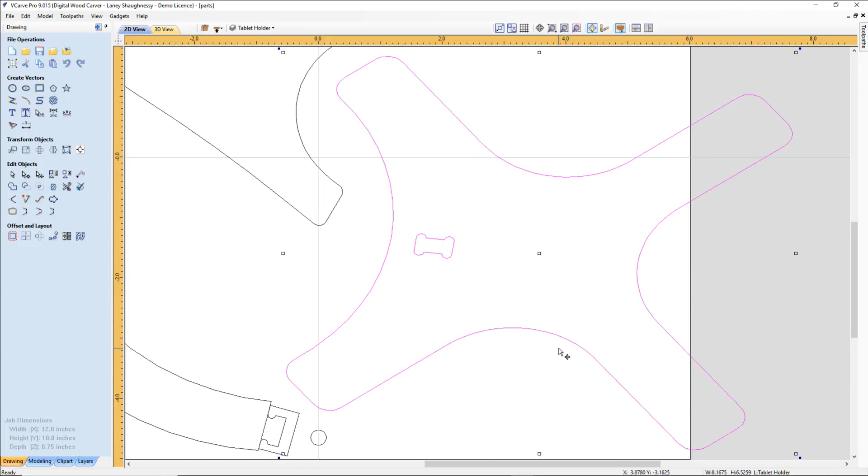From my measurement, let me remeasure that real quick. We're looking at about... all together, however I divide it up, basically with the base and the legs, it basically needs to be extended out another 1.5 inches. Whether I decide to stretch it that 1.5 inches, or change the body style and extend the legs.

I don't want to provide the files to the group yet until I'm 100% satisfied.

Luckily the screen on my tablet, for the second time now, has shattered from dropping it. I got a little clumsy with my tablet, and it's an expensive lesson to learn when you drop your tablet. It's like $100 and something a pop for new screens. I put the tablet on after I brought the piece in, and the first thing it did was just tip over. So I don't want to go too much on it.

Now, one of the things I did do is the design originally called for, I think I said something about making this out of like 3/8 inch material, 1/2 inch material. I did change it to a 3/4 inch piece of material. Like I said, I had to change my board size and move the parts around to cut out of the board.

All in all, it came out fine. I like the way it looked. It's a pretty cool looking piece, but it's not functional. The aesthetics could be the Mona Lisa as far as woodworking projects go, and if it's not functional, what good is it?

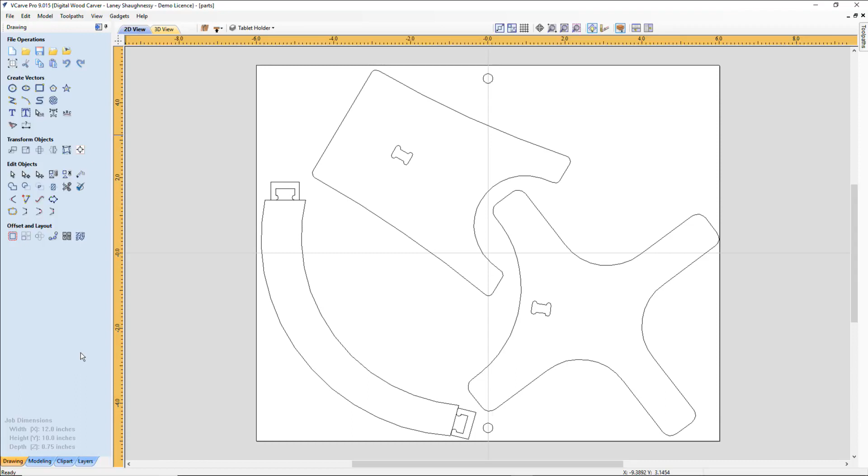All right, all that. Did I make any changes? No, I didn't make any changes. No, okay.

While we're in here, let's go ahead and open up a blank file. I'm just going to go with a 12 by 12 for some of these questions and demonstrations. Some of them don't even relate to the Vectric software - some have to do with the CNC USB controller software or the TNG.

In the past, when I've answered questions or tried to open up the CNC USB controller, it had locked up and gave me a black screen, causing a lot of buffering. So I didn't experience that this time. I don't believe I experienced it relative to this - it is the same steps in the CNC USB controller software.

Let's see if I can open the TNG software without causing a black screen. You are going to see a black screen for just a moment while it asks me if the program can make changes, but we'll see if we can get that open.

Alright, so you guys are already getting a lot of buffering going on. Okay, well, we are in a severe downpour right now, and I do not know - because I'm wired in, not wireless - if that has anything to do with the buffering. Hopefully not.

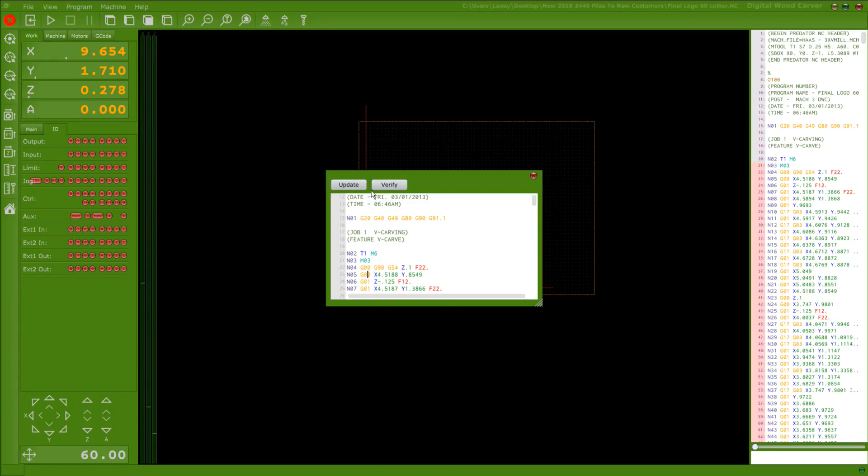It's killing me, really, because I'm stuttering on my words going, where the hell did it go? But we have the ability to come in and change things within a job. How do we bookmark in simulation mode, though? That's my question to the world. Ask Laney, how do we bookmark in simulation mode?

So bear with me a second. Here's my options. Start from select line, that's what I usually see when I right click. Start from selected line, start from a particular end and all. I'm not seeing it in simulation mode, so I'll jump over to the advanced options: start from bookmark to bookmark, from beginning to bookmark, from bookmark to end.

In order to do that, let's clear everything and start over fresh, and let me grab a line. I wish I was connected to a machine, because without that pause mode, my pause is inactive, so it's not letting me work. But one alternative: the line you pause on, write down the line number. When you load your program again to continue, locate that line number, right click, and start from that selected line. That's alternative number 2, without physically setting a bookmark. You just start from the line you previously stopped at, and make record of that line.

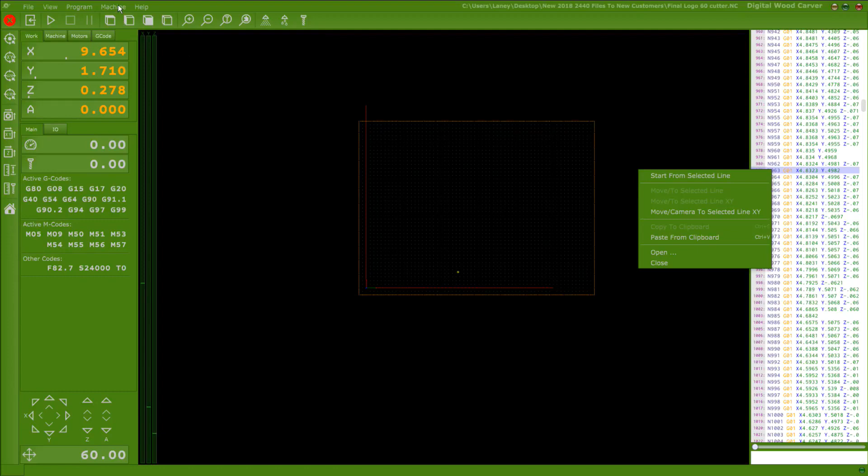Same process applies for TNG. However, I'm not connected to a machine, so it's not showing me the option to bookmark, but we would pause, then bookmark the line, and then we have the option to start from that selected line by right clicking on it. But within the machine menu, under the advanced option, we have some other options for us.

So we can run from bookmark to bookmark. We can run from the beginning of the file to a bookmark - that'd be like the stopping point. We can run from a bookmark to the end of the project. We can create a loop that just continuously runs.

If you're into kind of coding your own thing, those are the options, and they're found under the machine tab. That is the long and short of it. I apologize that I'm not getting the full menu here while I'm in simulation mode in the TNG, and I did not previously check this out to make sure everything would go through. So that's what you get with live events.

Now, on the TNG, how do you get your project centered on the screen?

Okay, that is one of the biggest misconceptions out there, and I think Dennis started it all when he wanted his board set up differently with offsets and things like that. So a lot of people think that this red box here on the screen is their table. That is not the fact, that is not the case. Now, you can set it up to simulate your table, such as Dennis did.

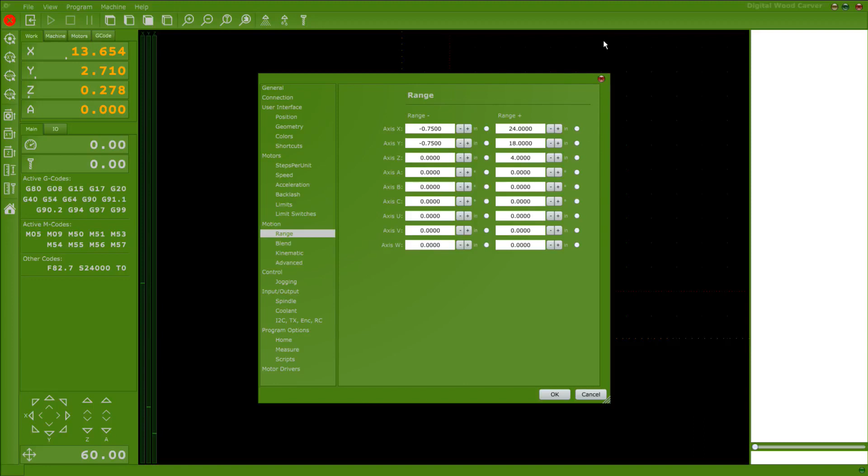I'm watching to make sure my screen doesn't go black. All right, in the settings, under your areas of limits of the range of movement, your range and stuff, you can make adjustments as needed to put the points in that position where you want it on that orange grid. But I don't want to convolute this, because that grid is not a representation of your table.

What's important is this start point. I don't want everybody going, why is my sign way off of the orange grid? Why is it over here? Why is it over there? I dealt with that back with the CNC USB controller. You need to focus on this starting point.

If your project is starting in the center for your XY datum position, your project will fall around this, and this will be the center point. If your project is in the bottom left corner, then your project's going to fall into here, and this red line is going to be on the left corner with this start point at the bottom left corner. If it's at the top right corner, then your design is going to be down here in this corner.

If you want it to be on the grid, you'll have to go into your settings, your range and limit settings, as well as the user interface, to get everything moved over. I'll do a video on that, but I don't want to confuse the issue, because then the phone's going to start ringing with, why is my design to the left, to the right, to this, that?

You need to focus on this. Also, I do not want you, because if you move this over to the middle of your table but clamp your board over here to the left, that gets into programming offsets and things like that, and it's going to become so confusing for you.

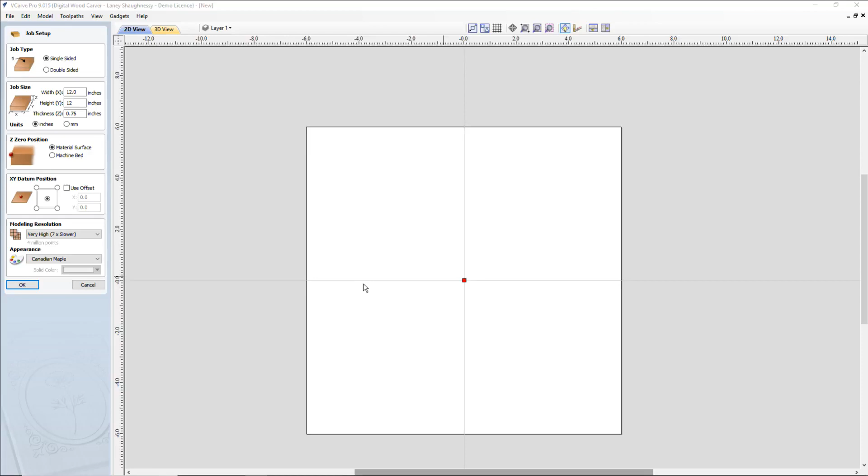Moving on from the bookmarks, in the Vectric software, how do you drop in pictures already saved in another existing project and made into a vector? Well, that's basically when you have a picture that you have traced in, that would fall under my pictures, camera roll, DXF files.

Foot shape. Let me see, I don't even know what this foot is, so let's see what this foot shape is. That's not a good picture. Let me trace a picture because I don't have any pictures right now on this computer.

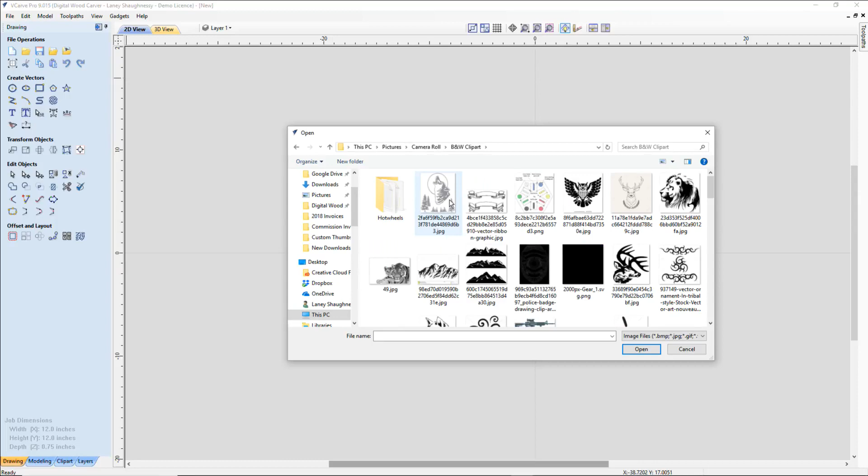Best way to do this is to import from downloads, import a bitmap for tracing. So we're going to start the whole thing from importing a bitmap for tracing. I'm going to go into my pictures, camera roll, black and white, clip art. Let's grab this lion head here. I'm going to open up the trace bitmap tool, turn the fading off on the bitmap image. I'm going to slide it through and preview that, apply it, and close that tool. Then I'm going to get rid of the picture by turning off the bitmap layer.

Now this is a design that's already been traced. I can take this design that's already been traced and export it, file, export, as a multitude of files, but I recommend a DXF file. I can export it as a DXF, and now that DXF file I can bring in.

I can come in and let's go ahead and delete this one. In another new project, I can come in and import a DXF, and now that project is imported in. It's already been traced, and I can work with it.

So long story short is, once you trace an image, why go through the process of tracing it over and over again every time you want to use that same image or graphic in another project? Once you have it traced, I don't care if it's not an image, even if it's just some text or a logo, whatever it is, export it out of the Vectric software. File, export it as a DXF, and save that file to wherever you want. Create a folder and start creating a bunch of DXF files for importing into other projects. Once you save it, you have it. Now you never have to trace that image again.

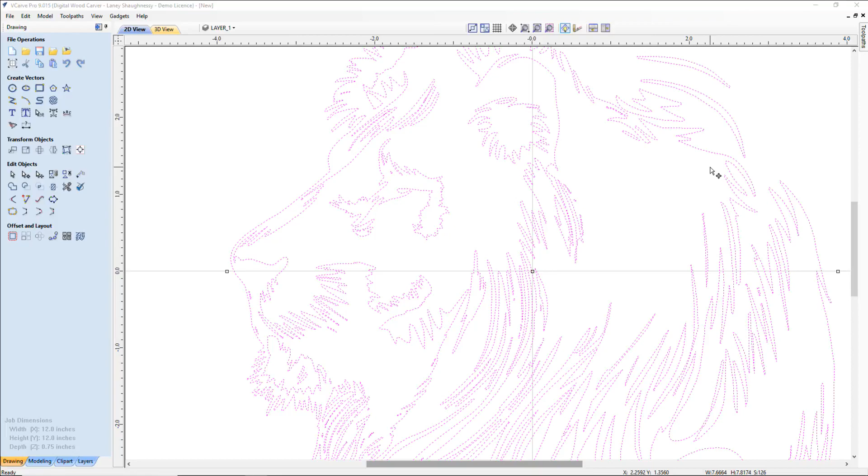Alright, now I don't have a black screen, but someone's beeping at me, so let me see what that is and see if it has to do with the class.

I'm answering a question for a customer, teaching a live class.

Alright, so export it out. Now let's stop here for a second because...

Be sure to check out the chat. A few people are sharing some information, which is good information. Very good.

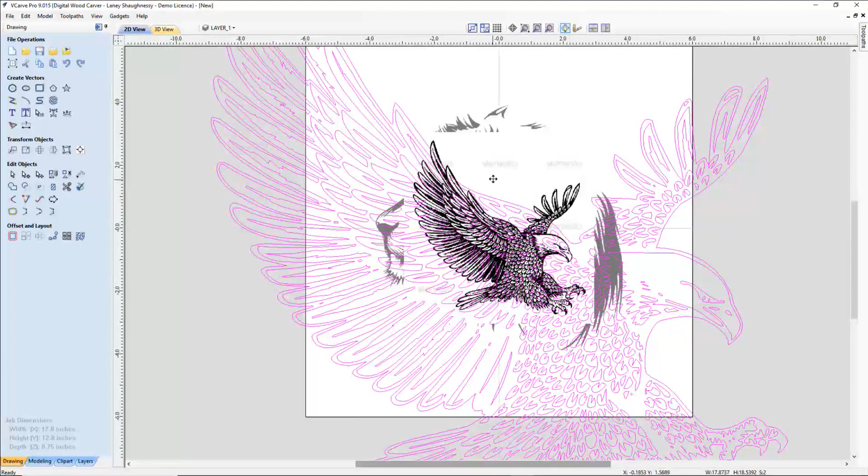But anyway, long story short, that's how you export a picture out to be able to bring that file into a future project. An example is I have this eagle here, and with the image traced and turned into a vector, why not export that out and save that DXF file so you can import it into a future project. And that's what you would do. You would export it out, and you have a choice: DXF, EPS, AI, SVG, PDF. I personally, when it has to do with something I'm bringing right back into Vectric, I save it as a DXF file. But there's all different types of file formats.

All right, so let's get back into that. Let's close this. That was a good question: how do you bring images in from another file, from another project?

All right, on the 2440 with the 2.5-inch dust hood, is there a dust shoe for the machine so I don't have to use the clear skirt, Velcro skirt, clear plastic Velcro skirt?

Currently, right now, we only have the Velcro skirt, but here in a couple of weeks we will be launching this brush. Evidently brushes have been something you guys have been exploring in the Facebook group. We visited brushes a while back ago, and this is similar to the style that we made many years ago when Digital Woodcarver started. We revamped it so it snaps into our existing magnets, our existing bolts, and all the magnets and stuff. So in the next couple of weeks, with 2 different brushes, there's going to be a brush coming to me this week from Burl and the guys, and I'm going to be testing.

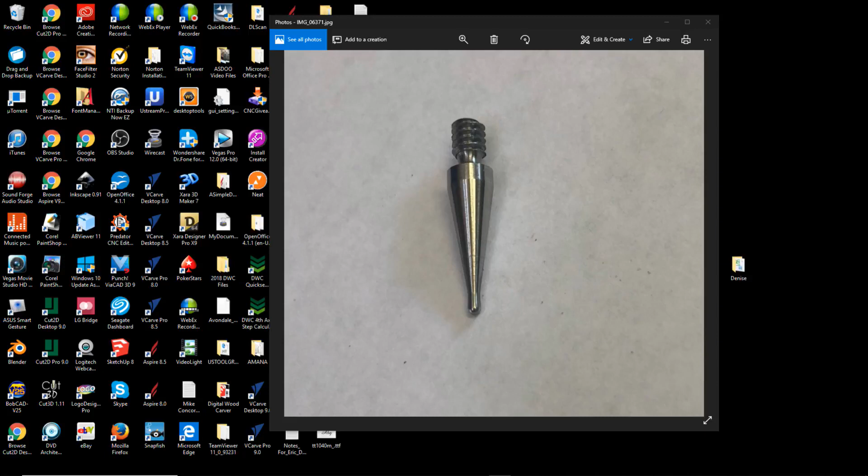But also in line for the owners of our digital probe, we now have a new probe tip. It is available on the website under the Digital Woodcarver accessories, and it has a point, a little over 1/16 of an inch, 0.067 tip radius, to provide higher resolution in those probed projects. All right.

Let's see if we can get through this without buffering. Like a champ, look at that. It's coming. Ah, Lord have mercy.

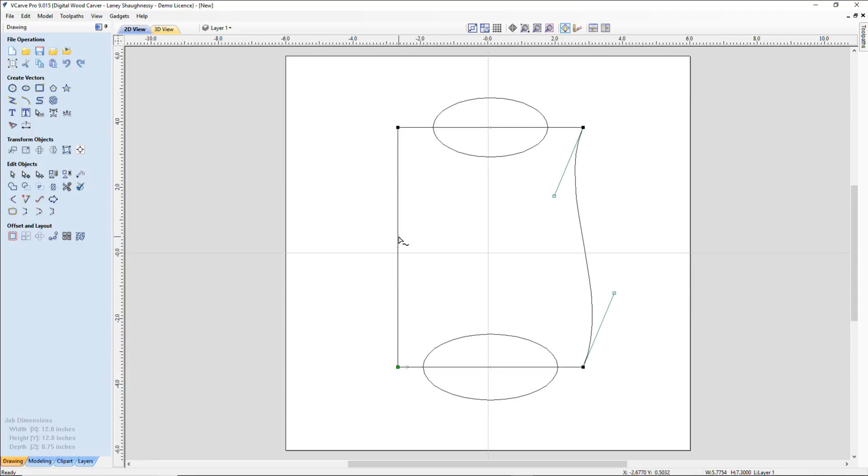And we can ultimately take all of these parts and weld them together after we select them, to create visually stunning borders. We can use our interactive trim tool so that we can trim away unwanted lines and intersections to create borders, depending on what the blend mode is and what it is you're trying to achieve.

Now this is a vector border, okay? Whether you offset that border to create that double line for V carving, or the single line for profile cutting, this is a vector border.

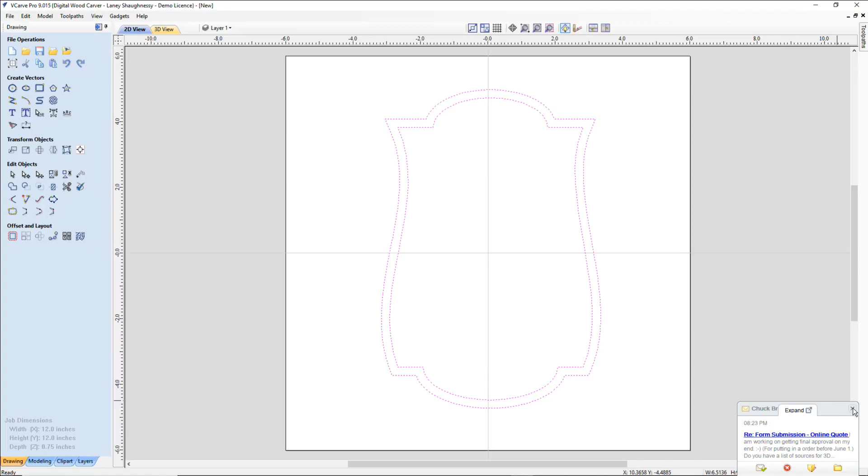If you're looking at creating a border that is like a profile, like a piece of molding, that is a completely different thing. That's not a vector border like you see here. We have to do one of two things when we create that molding. This particular design here is a vector border, just drawing multiple shapes, sizing those, doing some node editing for curves, whatever the case may be, and then blending those shapes together.

There is a wonderful video class on the digitalwoodcarver.com training site. It's the very first video at the very bottom: how to combine vectors to create borders. You can definitely revisit that and take a look at it.

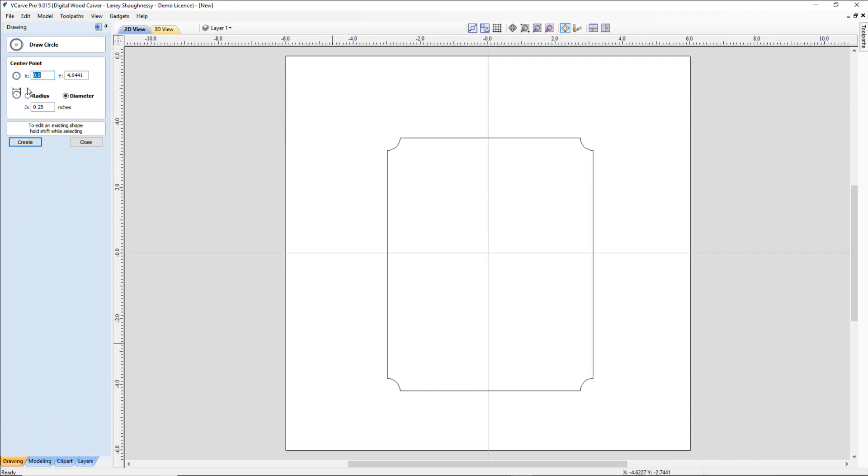You'll see those. Creating borders and all, it's basically just your imagination. Now, that's a vector border—blending, shaping, whether you draw a rectangle and you want that rectangle to have corners, or radius corners, or whether you want to add some style to it.

All you're doing is coming in here, and let's go ahead and mirror that one. Let's make sure my rectangle is centered first. And then let's take this guy and snap him back to the center there. And now let's mirror him properly, creating a mirror copy, flipping vertical.

We can select all of these and weld them together to get that kind of cafe menu style border and sign. You can create your offset, whatever it may be—let's say a half inch, whatever look you're going for, to create those style borders. You can just use a single line if you're going to do a profile cut. So making borders is very simple, it's just a matter of combining shapes and things.

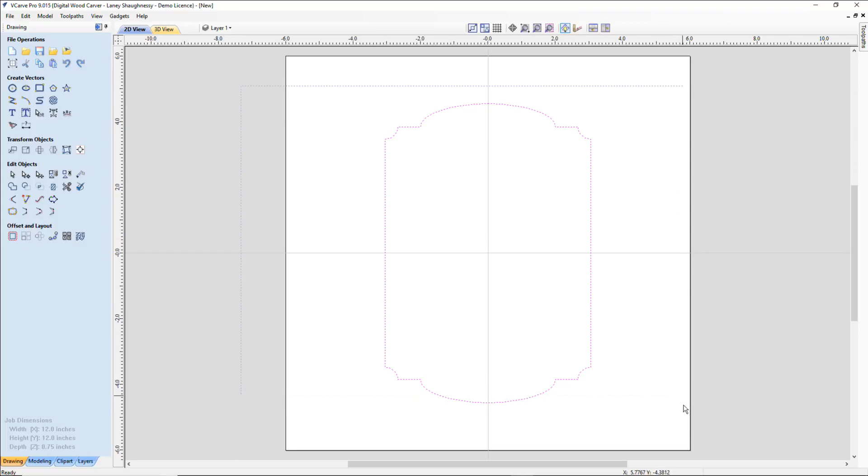But now let's talk about the actual molding type borders. Let's imagine I have a rectangle the size of my board, and I offset that rectangle inward a distance of 1.5 inches, then delete the original rectangle, just creating this inner rectangle. From this inner rectangle to the outside of my profile, that distance is 1.5 inches. Therefore my profile border has to be that wide, at least 1.5 inches.

How do we obtain that profile border? How do we get that shape? Well, the best and easiest way is to start off with a rectangle. For me, that rectangle is going to be 1.5 inches, that same offset distance, by however tall I want the border to be. Now if I was carving 1.5 inch material, I might want a thick border, so I'd probably go an inch, 1.25 inches.

If I'm carving 3/4 inch material, I'm probably going to go about 1/2 to 5/8, whatever it may be, but I wouldn't go the full 3/4—I'd leave a little bit of meat at the bottom. So in this case we're going to go 0.625 inches tall, let me get that decimal point in there. And now that's going to create this shape.

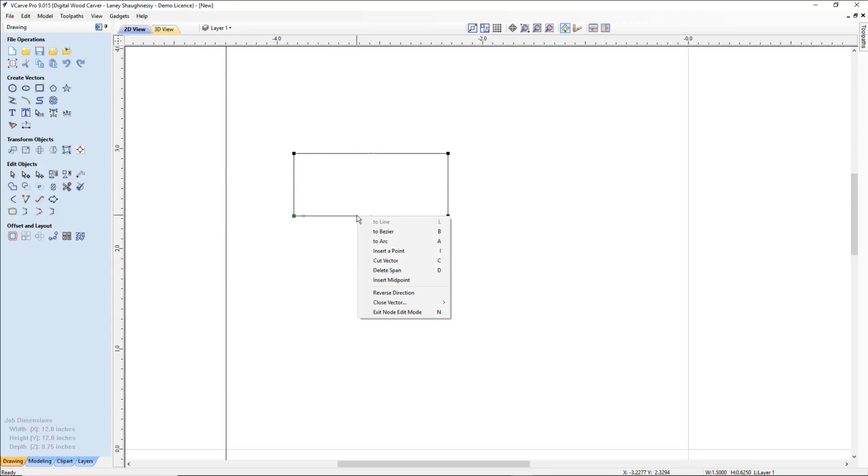Now from here I can create whatever I want the profile to look like. When you're creating a profile for a molding toolpath, you do not use the bottom span. A span is the vector between two points, any two nodes—the line, curve, or arc between two nodes is a span. So we're going to right click on this line, right on it, right click, and delete that span.

You're only working with 3 of the lines, the top 3 lines. Now from here you can start to shape your profile any way you feel. Keep in mind, whichever way you have this shaping, it's going from left to right, so it will carve from left to right. You do have the option to reverse the toolpath in the molding toolpath, making it carve right to left. But if it's something you'll use in the future with a certain style, draw it the way you want it to carve.

In my case, I'll go into node editing here, pull this down about halfway, snap to that halfway point, then come down—there's another halfway mark here—and snap to that. Okay, that's going to give me this angle.

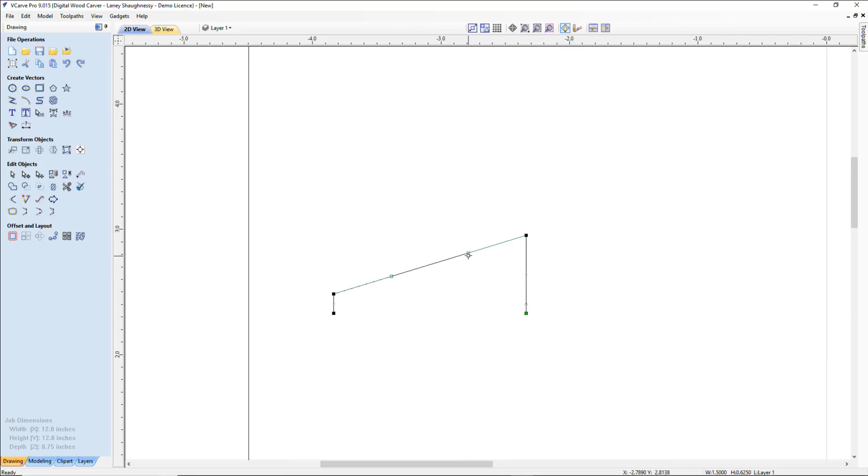Now at that point I'm going to right click on this line and turn it into a Bezier curve. I like moldings with curves, so I want that nice curve coming in, but a nice gradual slope coming down.

I'm going to grab a circle, throw it here, and then grab my line tool. When this cove comes in, this bead comes in, I'm going to have it come down a small amount—take a line and draw it straight down, straight over. This line can be whatever shape you want it to be. Oops, I didn't want that, so undo—I want it nice and straight coming across. I can even have it step down another distance if I want, or maybe even at an angle.

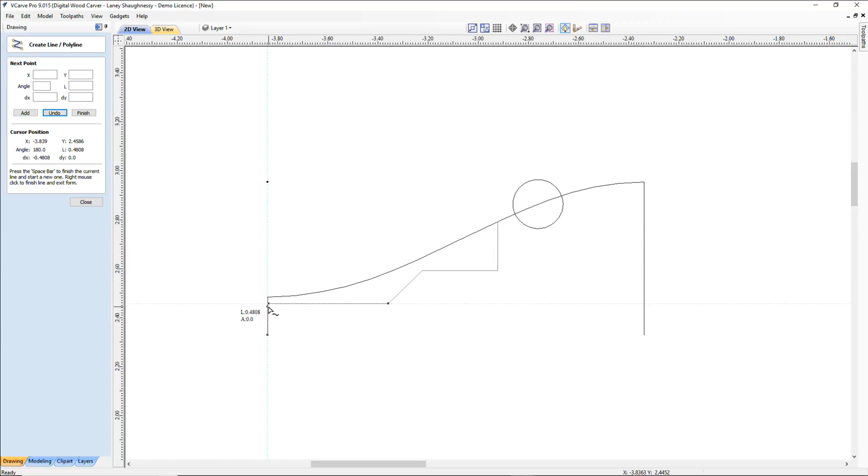Let's go with 45 degrees. See if we can maintain that 45-degree angle, and then come across straight across, let's snap to it. Spacebar to finish. Now from here I'm going to just step down straight and over, 90 degrees.

I'm going to add a fillet, a normal fillet, about an 1/8 inch radius here. I kind of like that sharp point, but I do want to gradually come in. I like that sharp point there, so I'm going to keep that.

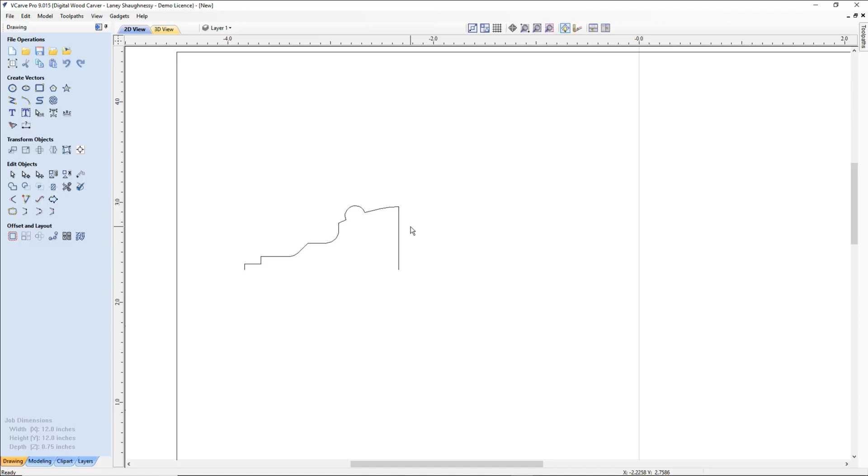Now I'm going to use my trim tool, and I'm going to remove the parts of the shape that I don't want. So therefore now I have a profile, and I can soften up edges and things.

I like this sharp point here, I'm going to keep that. I'll keep that sharp point there, but I do want it gradually radiusing in. And now I have two things: I have a profile and I have a path that profile is going to follow.

My rectangle is my path, my profile is my profile. So in the molding toolpath, that's the only two things we need. We need to select the path first, followed by the profile. And if you have your size and everything correctly, the straight lines, not the angled ones, will extend to the end of your frame.

And once, if it was overshooting it, or if it was short, that tells you you need to change the width of your profile. Now with that, I would use my 1/8 inch ball nose end mill, and I'm going to calculate that toolpath.

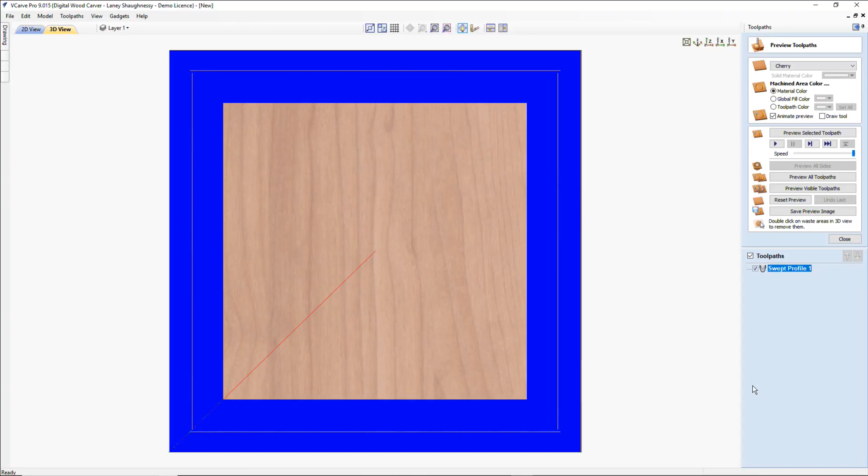Now notice it didn't create the sharp corners, so I'm going to go back in there. I like sharp corners, I want it looking like a mitered frame, so we're going to check off create sharp corners and recalculate that. Much better. And we're going to preview that selected toolpath.

All right, let's turn this to its side, and let's kind of zoom in here and turn it around. All right, so let's get rid of the center rectangle so we can have the cutout, so we can actually see that and kind of take a look.

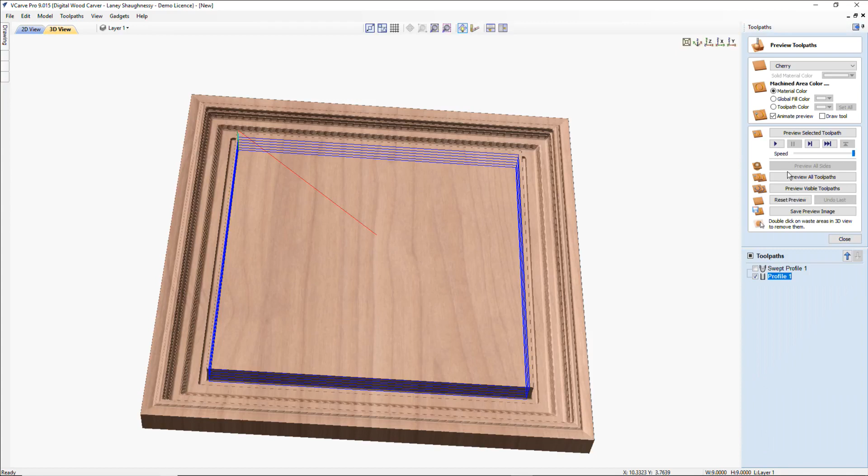We're going to do a profile cut on the inside of the line. I'm really not caring what size bit right now, because this is just for show. Calculate and preview that selected toolpath. Let's get that part cut out of there.

Okay, now with this frame, let's take it up a notch. It's all right, that's good, it's good there. Let's hold down my control key, my middle mouse button, and drag this over. Let me zoom in. Control, middle mouse, and drag it up.

Okay, so my profile is cutting in the way I've got it designed and everything. But what if I wanted it coming the other direction? What if I wanted to reverse it?

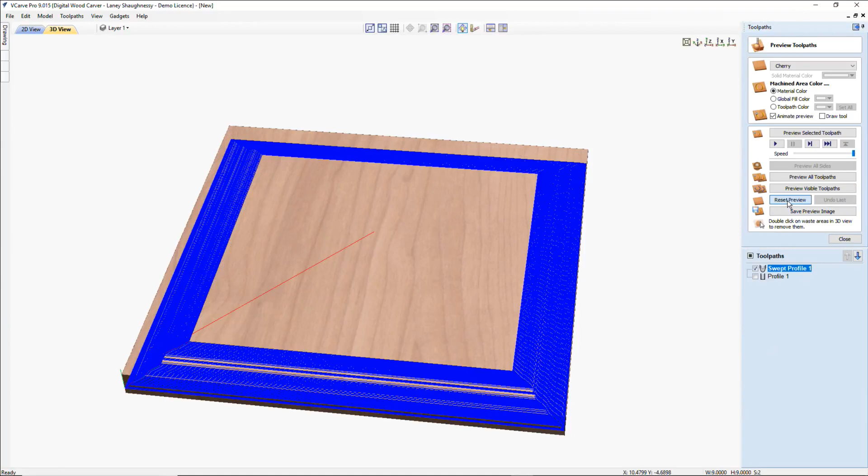Then I would simply open up that swept profile, go back to the 2D view, and on this green node, I can reverse the direction. Right click on that green node and reverse the direction. The node will switch over, and you can just simply recalculate it. You can reset that preview and preview that toolpath again.

And then let's get rid of the middle. So whichever way you want that profile cutting. Now for me, when I'm doing a picture frame of sorts, an art frame or something, I like the high coming into the low. I don't like the thickest part on the inside of the frame like this.

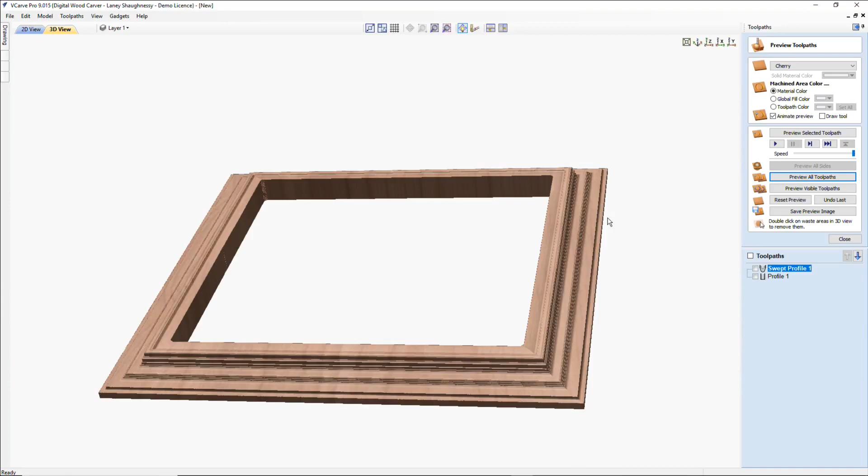If I was doing some type of cabinet face or something, then yeah, this might be acceptable. Maybe it's kind of a raised panel type effect that I'm going for, then yes, I need that thin area down here so it fits within my raised panel rails and stiles. But for me, the way that I drew it is from running left to right, and that's what I want.

And now let's change this up a little bit. Let's close this for a second, and give ourselves a little bit of a change here. Let's go into node editing on this, and let's smooth this point out and create this as a line. Delete this point, delete this point. So I have this nice little curve, just a very short slope here.

And I do want to pull this down ever so slightly. There we go. And for here, let's go ahead and turn this into an arc, and pop up a little bead there. All right, slight little change there.

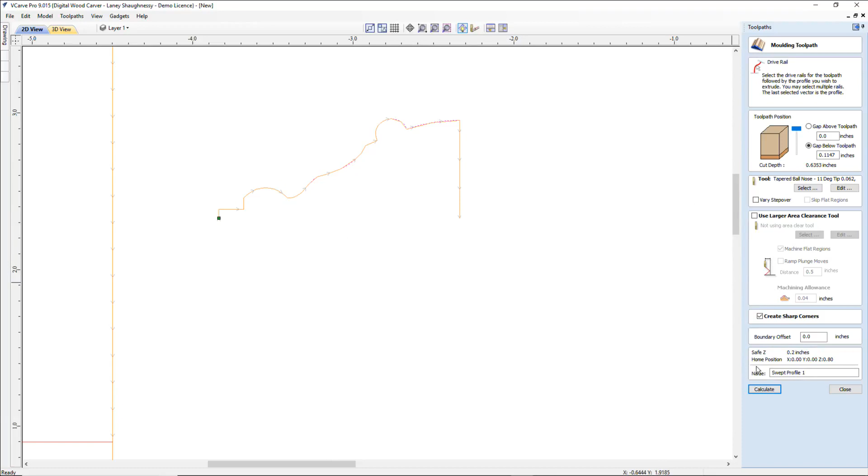Now we'll go back into that toolpath and recalculate it, reset that preview, and then preview that selected toolpath. And again, when I'm doing frames and things, I like the thinner in coming out to the thicker frame - picture frames, art frames, what have you.

And typically on the back of this, there would be a pocket where it would fit around my canvas and stuff. Let's cut out that center.

Double click on it to get rid of it, and let's pop this up into a full-on view so we can see that frame and all.

Speaking of exporting out, when you create your profiles and you find a profile you like, or as you create profiles, export them out as a DXF.

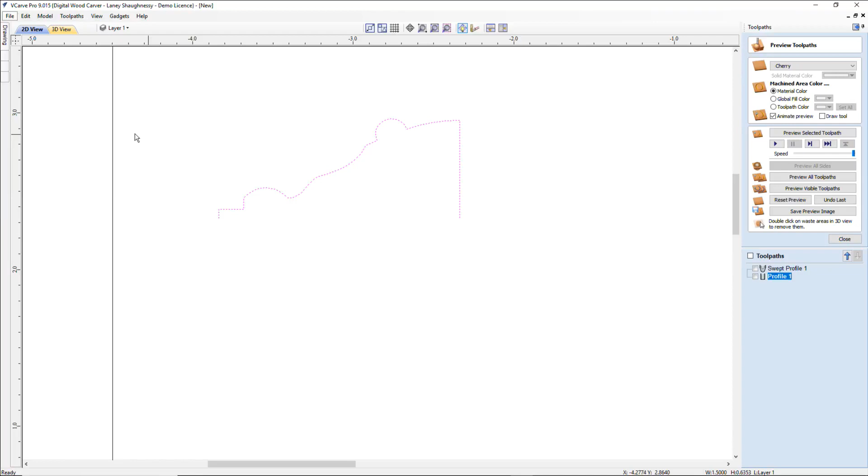So what I'm going to do is just save this as new molding 1.5, just so 1.5 inch, new 1.5, and save that.

But what that allows me to do is I can go in now and I can import those picture frame profiles, all of these. I could have done that to begin with, where I have all these profiles, these picture frame profiles. I can add this guy to the group.

Rather than just saving an individual file and then having to delete it, just add him to the group, and now I will export them, select them all, and export them out as a DXF. Now I will overwrite that picture frame profile, replacing it with a new updated one. As you create profiles, add them to it and start getting a repertoire of different profiles and things.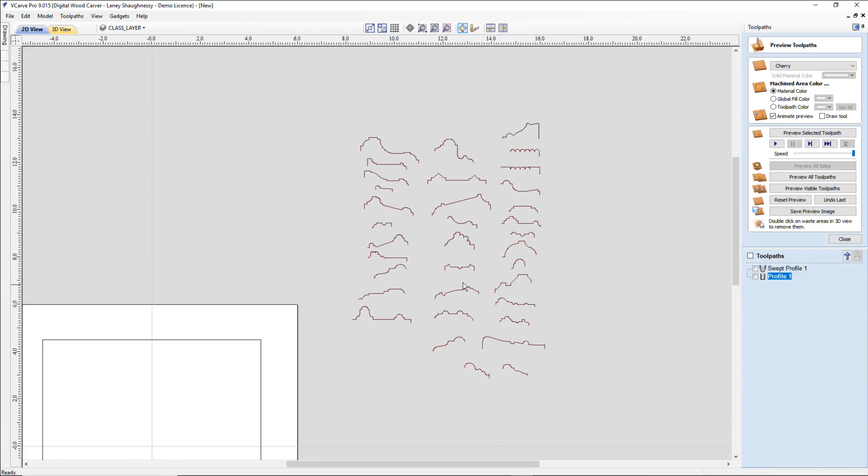So that's how the swept profile is how you create a border with a molding for your picture, your carving, whatever it is, or you're just simply creating the 2D. Now you know why I didn't type all that out in Facebook.

All right, let's go back here. You guys all still with me, or did I put you to sleep?

Can you do a molding toolpath on just 3 sides? Absolutely. You can do a molding toolpath on anything.

So let's imagine that we'll make an arch there, 3 lines, so that would be a rectangle. Go into node editing on this guy. Let's hit escape to close that tool, node editing, and delete this span.

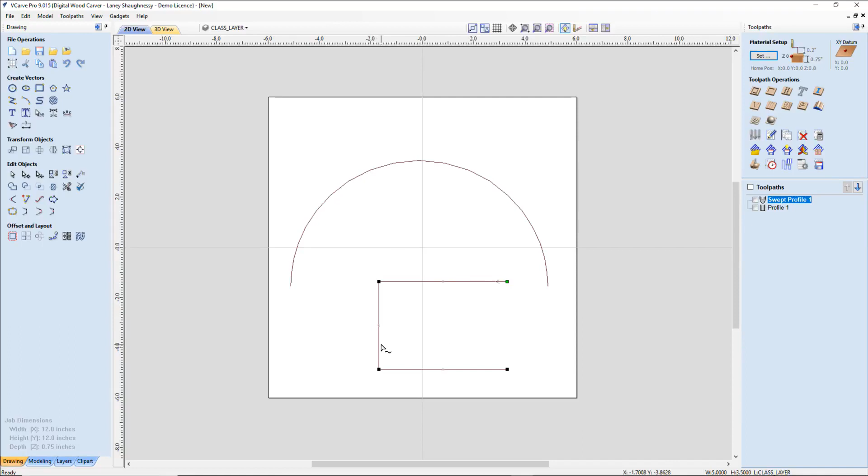Let's imagine that that's the left leaf of our table, whatever it may be. Your profile can be any shape that you want it to be. It doesn't have to be a rectangle. It doesn't have to be a square. But here's 2 options here.

Now I'm going to import my picture frame profiles here, and let me grab this guy. Get out of node editing. Let me drag him over here for a moment.

Now, depending on his length and width, it all depends on how wide I want my molding to be, how wide I want my molding to be and things.

In this case, if I look at the size of this, this has an overall length of 2 and 2 and 7/16, a little over. I would want, let's say, 1.5 inches. You know, scale that down, 1.5 inches wide, and I'll use that for both.

So in that molding toolpath, select your profile, select this. Now, you have the lines coming in or going out, depending on which way you want this molding to follow.

This green node here, you either reverse direction, it's going to carve inside this small arc or outside of this arc for that higher radius. Calculate that toolpath. Reset that preview of the selected toolpath.

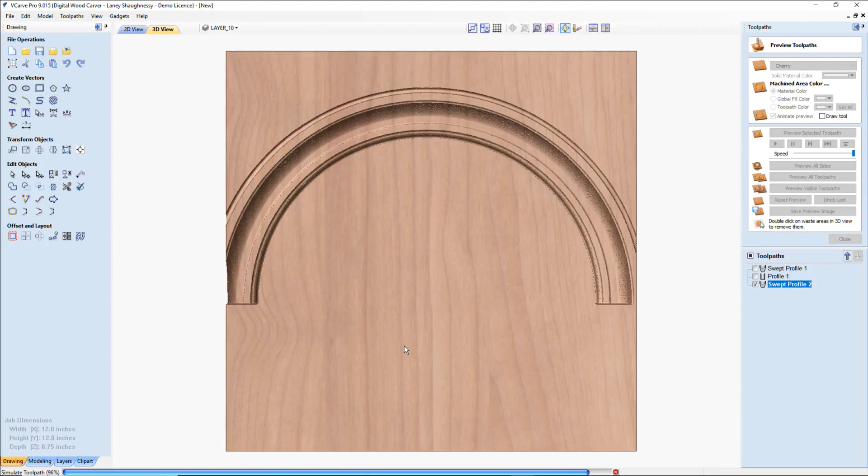If you're making the arch for the top of a window or something, and let's say you've got to make this arch in segments, that's where tiling comes in, toolpath tiling and stuff, and all. So you can create that arched molding, and then do your profile cut.

And of course, your profile cut, knowing if we come into this and we open this up, knowing that we have that 1.5 inch distance, we can offset. We can close this tool here. We can offset this outward that 1.5 inches.

And then we can take, depending on what angle we need to cut this molding at and everything to make it look good and all, we can join this. Oops.

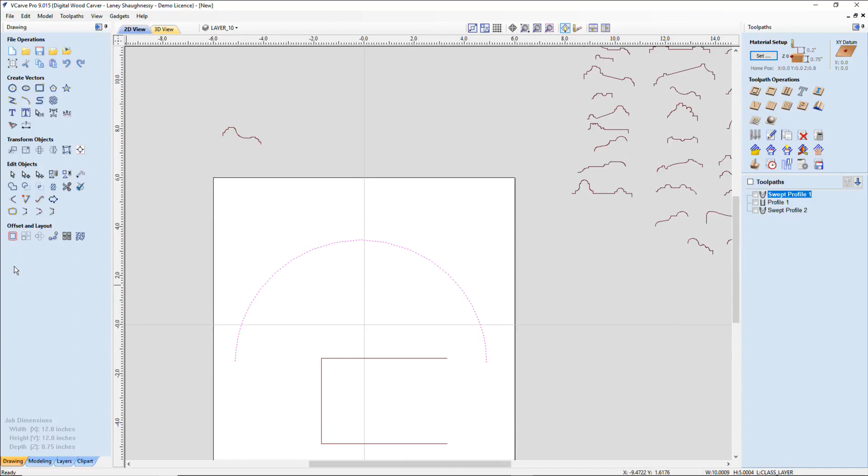I offset both, bear with me a second. Let me offset just this one. There we go, ta-da. I offset my other profile too.

We can join this with a straight line, close it off, so that way we have the profile cut to cut the part out. So if I were to create that profile cut, I think my ends are going to be a little off, but let's calculate that, and now we should be able to.

Killing me. This guy right here, profile cut. This guy, calculate them so we can cut out that molding.

You know, depending on what angle you needed the ends at, that's the important part. So yes, you can do it on an arc. And if we did the same thing here, if we select this profile and calculate that molding tool path, you know, if you're doing that leaf of that table or what have you, the answer is yes. It can be a straight line, a curved line, arc line, whatever it needs to be. You can create that molding profile. In this case, you'd most likely reverse the direction of that one because it's kind of high and heavy, so that it's coming from the outside down type of deal. Whatever it is, but yes, the answer is yes.

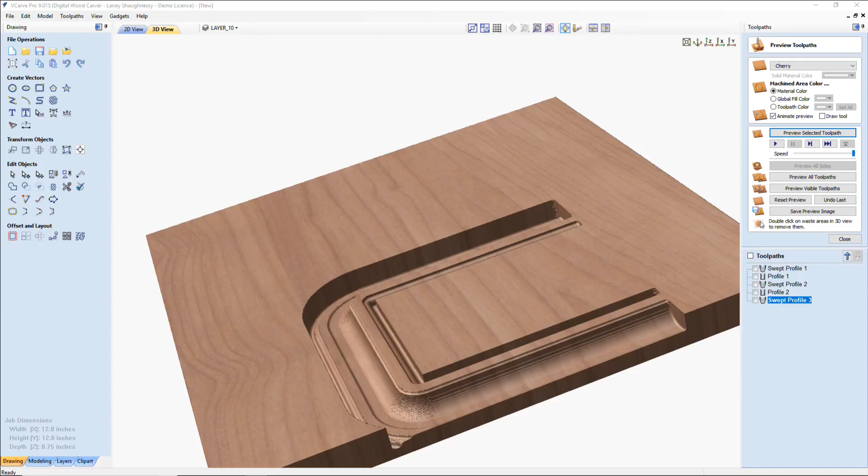All right, let's go up here. Okay, let's close this, or not close it, but let's delete all those. Okay. Bear with me as I peruse. Alright, I would like to know what I need to set up in VCarve Pro, Desktop, or Aspire in this case.

So when I check the times of the carving toolpath, it is more in line time-wise with the carving time that is stated in the CNC USB controller. So your estimated time in the Vectric software currently, right now, if you're using the 2440 CNC, your rapid rate is 150. If you're using the mini carver, it's 125. The scale factor is 1.2. So let me explain to you a little bit about what scale factor is.

So let's say I have a scale factor of 1. And my estimated time says to cut all these profiles out of my board, whatever it is, it's 3 hours and 56 minutes. And then I go into my CNC USB controller program or my TNG program, and I run that job. If that job takes me 3 hours and 56 minutes, then my scale factor of 1 is correct. If it takes me 4.5 hours, then my scale factor needs to be adjusted.

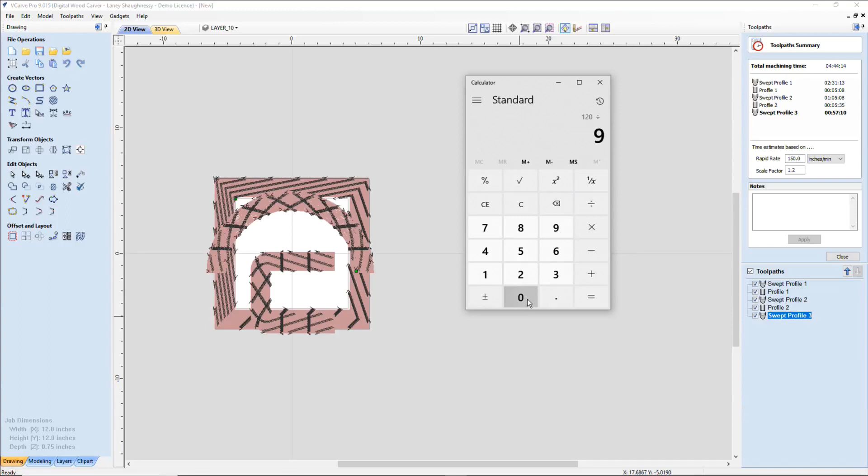So if I have an hour and a half long carving, 90 minutes, and that's what the software is telling me, and I go in and it takes me 2 hours, then that would be 120 divided by 90 equals 1.3, or 1.33 if you want to be spot on. And so that sets the scale factor, and that'll bring those two more in line.

And the deal of it is, the Vectric software doesn't know how slow the machine slows down when it's going around corners, what its acceleration rate is - all of these factors that come into machining time. All it knows is the feed rate, the plunge rate, and the rapid rate of the machine when it's not carving, moving above the board from one place to another. It only knows those three things. It doesn't know acceleration, deceleration around corners, and ups and downs. So it can't take those into effect.

That's what the scale factor is, so we adjust the scale factor accordingly. If I have a 1 hour carving in Vectric and it takes me 2 hours, then my scale factor is 2. So you just adjust your scale factor and that will bring you in line, so both your estimated time tool summary in the Vectric software and your estimated time tool summary in your TNG or CNC USB controller bring those two in line together. Good question. Alrighty.

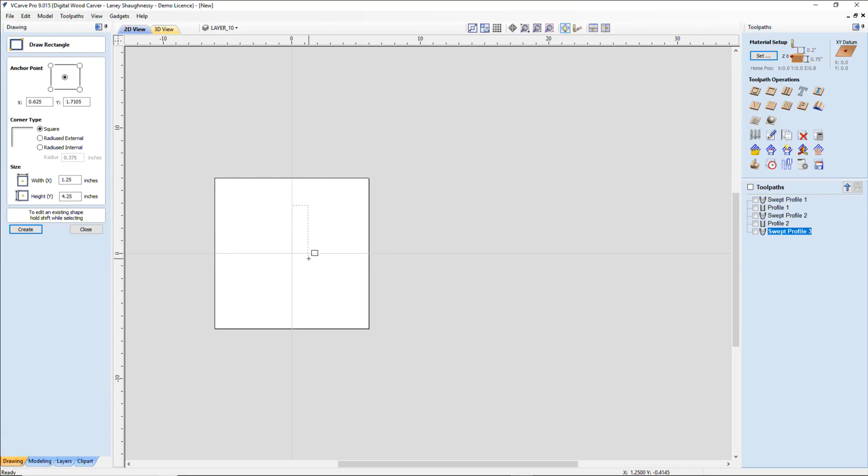Okay, let's go up here. What are the rules for zeroing out the Z-axis on the digital wood carver diamond bit? Good question, let's see here. And I'm trying to go through these - I'm not in any particular order, guys, I'm just going through - and let me see if I can draw this out.

Okay, let's make this one a little fatter. And let's get him centered up. Okay, oh, we're missing one thing. And I need a circle. Where's the circle at?

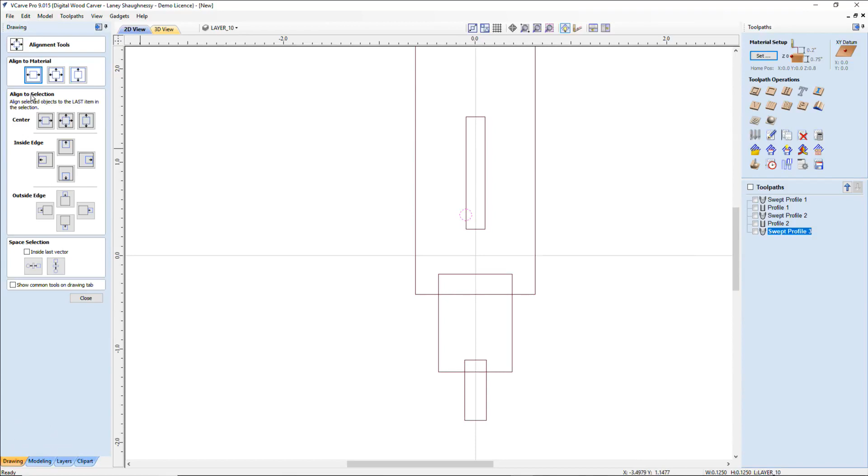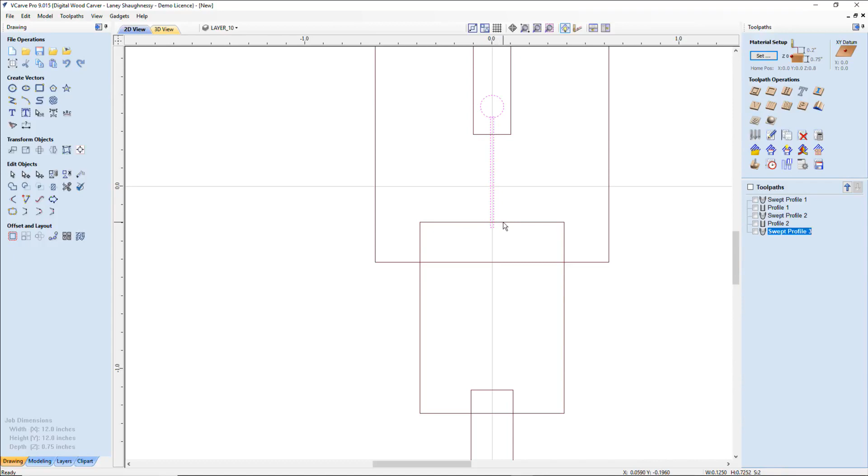All right, play along with me. Imagine that this is my diamond drag bit here. Now this diamond drag bit is tied... let's see if I can tie it together. Bear with me a moment. I want this to be as accurate a representation as possible, so let me get everything done, and let me grab this, and weld it together.

All right, might as well get this one welded to this one. Okay, now inside of the router bit holder, inside of the bit holder, we have our diamond bit, and there is a plunge mechanism. It's spring loaded. So up in here, there's a spring inside of this holder.

When you are zeroing out the diamond tip bit, typically you're either doing the quick engraving toolpath, profile, or pocket, depending on if you're doing a fill engrave or a profile following the lines. Or you can use the quick engraving, which is a combination of both. That's similar to if you were doing a laser cut, but with the diamond bit you're engraving.

And so with that diamond bit, your cut depth, whatever it may be, should be set to 0. Just like if you have the digital laser, your cut depth is 0. We don't want the router moving up and down, okay, when it's engraving.

But with that spring, what we want to see happen is when it's in its resting position, this ball here in this little window on the side of the bit, when we bring this... let me see if I can do this systematically. Let me get it touching on the bit. There we go.

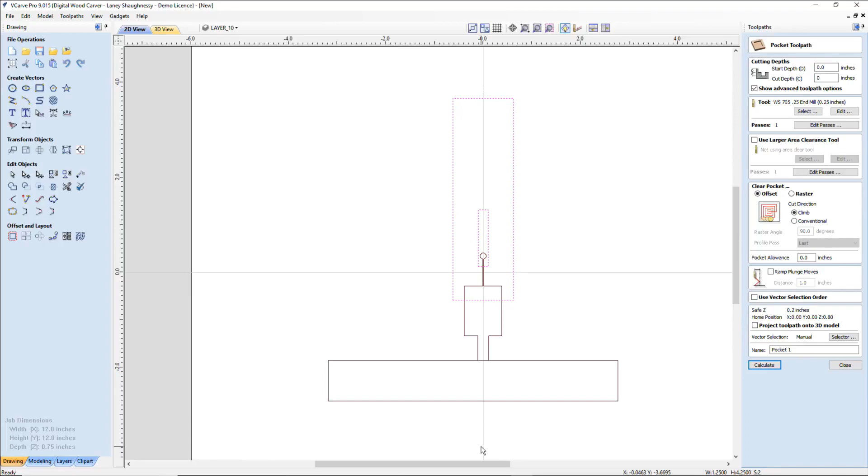And that's where you would zero out the Z in your CNC USB controller or your TNG. It will make the Z with that much pressure. That way when it's carving, it's putting pressure on that spring, and that spring is keeping the force of that bit against the material. So the goal is, on the little window on the side of the shank, the holder part, you want to see that pin retract up about a quarter of that slot, to have decent pressure against the bit, with the bit against the material. That's the key to it all. That's where you should be zeroing out your drag bit.

My pause, sorry about that quietness for a moment. Trying to read. Okay.

I know the answer. However, as a new user, most beneficial for... So when it comes to end mills, upcut or downcut bit, where's the best place to buy bits?

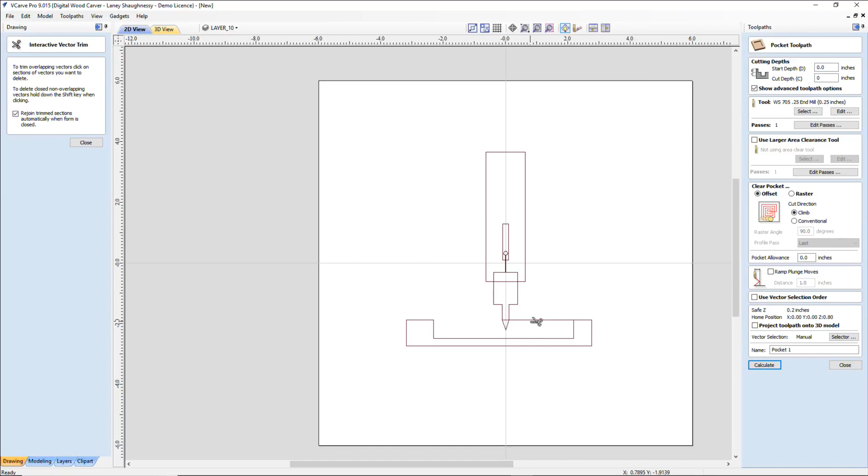Let's, since I got a router bit here, pretend for a moment that this is a V-bit. Okay, and let's pretend... all right, let me group all these guys together.

Imagine we have just done the clearing pocket path for a V-carve raised effect design, and we've got our V-bit in. When we put that bit in, we always zero out the Z on the original surface of the material, because that's where we've set it up from.

If I'm getting inconsistent cuts, maybe my touch off was a little too heavy, so my cut is coming a little deeper, leaving a groove, or maybe it's a little light, so I'm getting a little lip around the letters. What would be a way we could compensate for that?

We can actually move the bit in, and you can even use your touch plate if you want to. But let's say that this pocket cut here is a quarter of an inch deep, right? 0.25, a quarter inch, whatever — I can bring my bit down and touch off in that pocket.

Kiss right down to it, not with my control key. And in the software, the TNG software, I can come in and tell it that position — instead of zeroing it out at 0.01 or whatever, I can type in negative 0.25 in my Z box, telling the software that this point my bit is sitting at right now is negative 0.25.

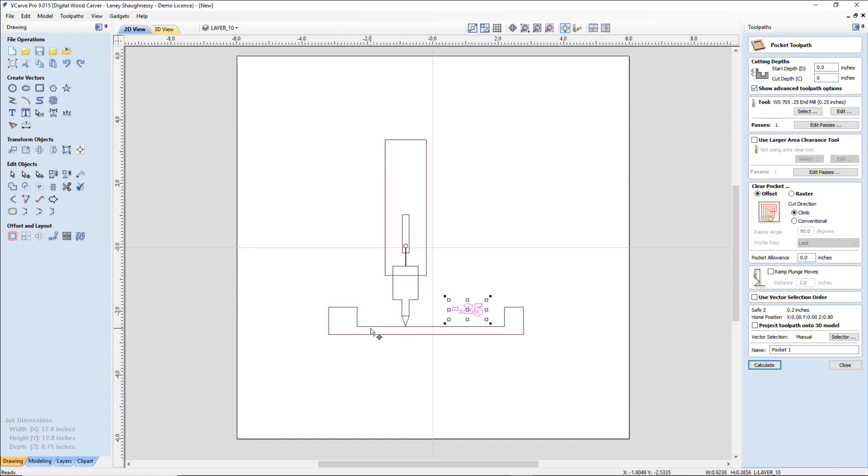Now, if you're not comfortable touching off and wondering what happens if I touch off too far or not enough, well, if at all possible, if you can throw your touch plate into somewhere in that pocket and hold it nice and flat, you can touch off.

Let's undo that. You can touch off on the top of that touch plate.

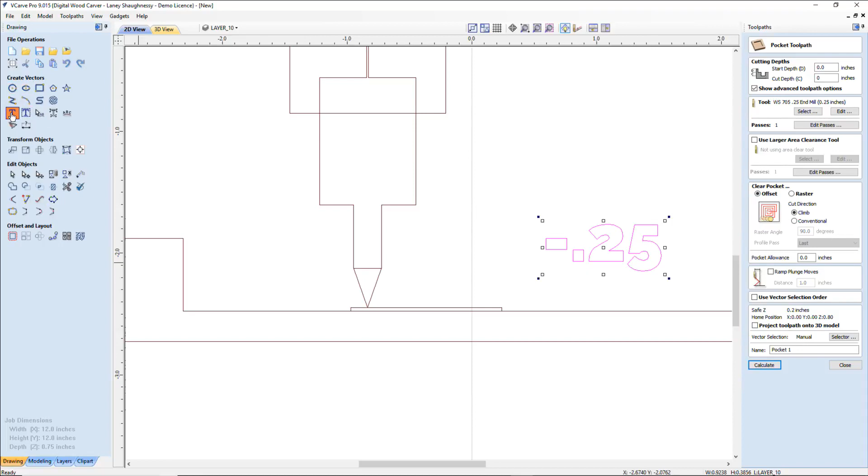And now you tell that program that you're at — any guesses? 0.24, not 0.25 — 0.24, because you're sitting 0.010 of an inch up from the bottom of that 0.25 pocket. Now you're sitting at 0.010, so subtract it from there.

And now the software knows where it's at, and that will create a consistency between the V-carve cut and the pocket cut. If you can't get a consistent touch off because your V-bit might be poking into that touch plate more so than the end mill did — since it's a wider surface area on that end mill versus that sharp point of the V-bit — and you dimple your V-bit, you're just not getting a good touch off and you're getting these witness lines, well then zero out the machine.

And when I say zero, I don't mean zero, but come over and move the machine, touch off in the bottom of the pocket or on your touch plate in the bottom of that pocket, and program your Z for that depth — tell it what it is. This is this depth, and then it will know. That's essentially the same thing as setting the Z-zero. 0.25 inches from this point up is zero. So that's another way of doing it.

Yeah, and let's see here, let's see if I can find... Howard Wayne, tell me if the Dave Garbett question is in the group or in the list that I'm reading off of in the Facebook. If it's in the group, I got to scroll up in the group. Let me know, Wayne. All right, let's see what we got here.

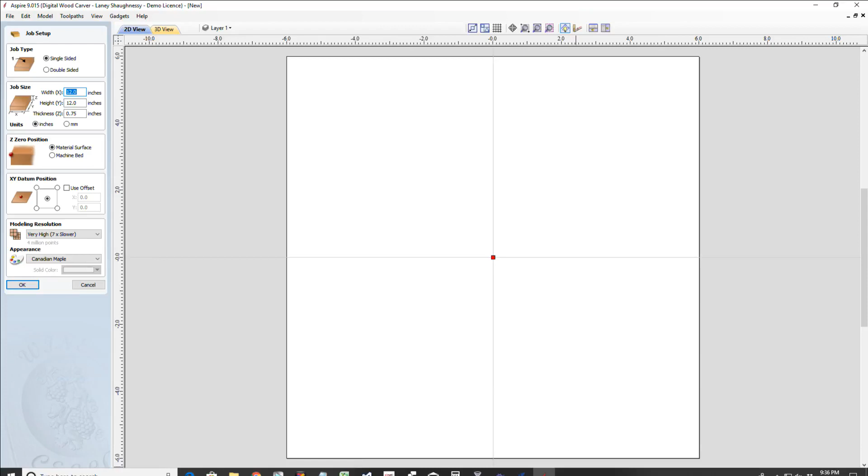All right, so the purpose of a two-rail sweep is to have a profile or a design follow a path. You have two-rail sweeps, one-rail sweeps, cylindrical sweeps and stuff. So with a two-rail sweep, you are either drawing your lines vertically, and let's draw some lines.

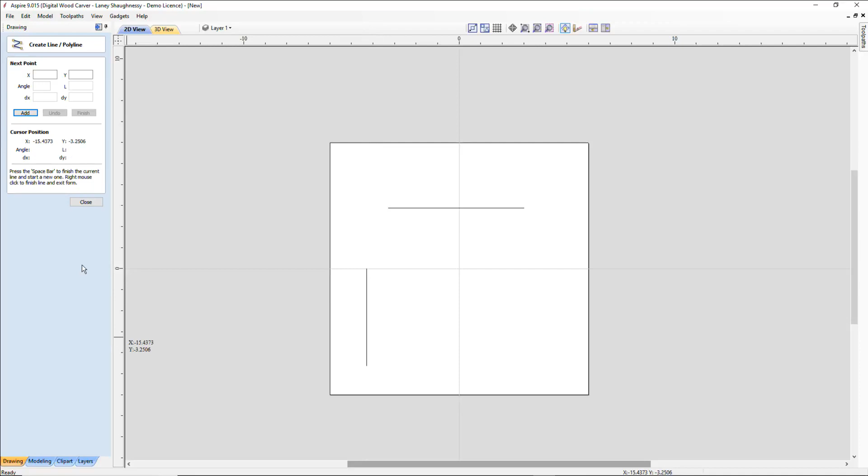Or you're drawing your lines horizontally. And of course we need two, so I'm going to hold down my control key and drag this one over, and drag this one up, holding my control key. And now...

I need a profile. So I'm going to node edit this, delete this span. Very simple profile, we're just going to turn this into a Bezier curve. Let's pull this one down and let's pull this one up.

Once I have my two-rail sweep tool, I have to first select my guidelines, and those become your drive rails. You want to make sure your rails are driving with start points in the same direction. Those arrows here need to match, or else it twists your profile.

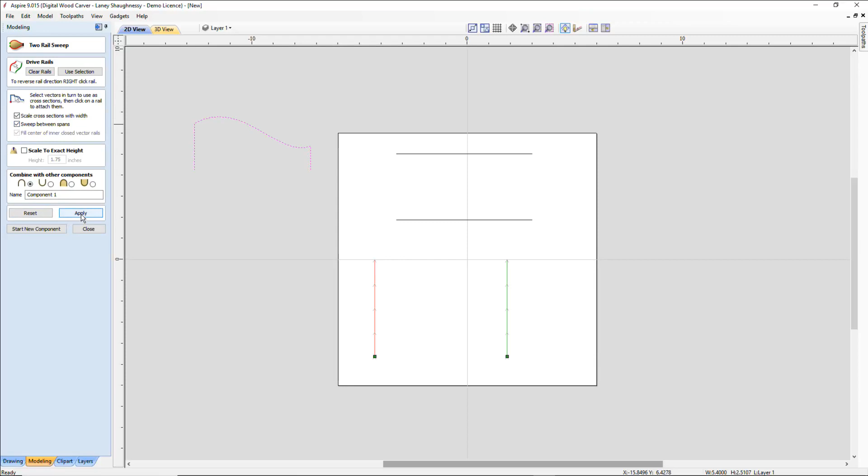Once I have that as my selection, then I select my profile and I have options. I can scale the cross section with the width, sweep between the spans, fill the center, whatever the case may be, and apply this. And that's going to ultimately create that two-rail sweep.

Same thing if I had my horizontal lines and this profile, that 3D view -- so it's just you drawing your two lines, your curve.

The two-rail sweep doesn't have to be a straight line. It can be an arc, a curve, a Bezier -- again, just like we were showing with the molding toolpath, if we were making archway molding or things like that, we can use the two-rail sweep for that as well. We're just drawing that path, those two lines, and then drawing our profile, whatever shape it may be, to sweep between those two lines.

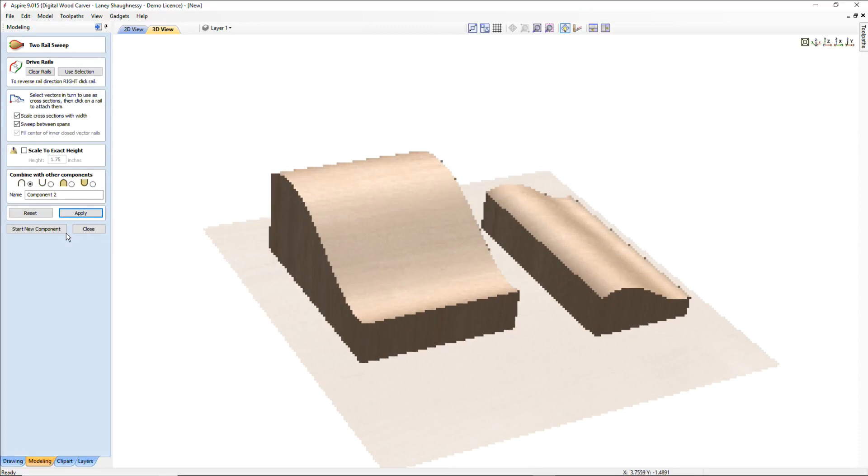So that is all there is to the two-rail sweep, and it can be even geometric shapes, guys. So let's say I have a 4-point star, not a 5-point, a 4-point. And I come in here and scale this down holding my control and shift key, and bring in a smaller version.

So now my two rails are the outside of this little bitty profile and the outside of this big profile. With my two-rail sweep tool, I've got my profiles selected, and those are my guide rails, my selection.

Now I can actually add cross sections to this. I can reverse the rail the way it's flowing, remove cross sections, which I haven't added yet, but I can make it a start point. I can swap the rail order, which basically reverses it. So there's all kinds of things I can do in here.

And I don't want to scale the cross sections here, let's see here. Let me get my mouse. Oops, let me select it. I keep right clicking, I want to left, left, left, right, left.

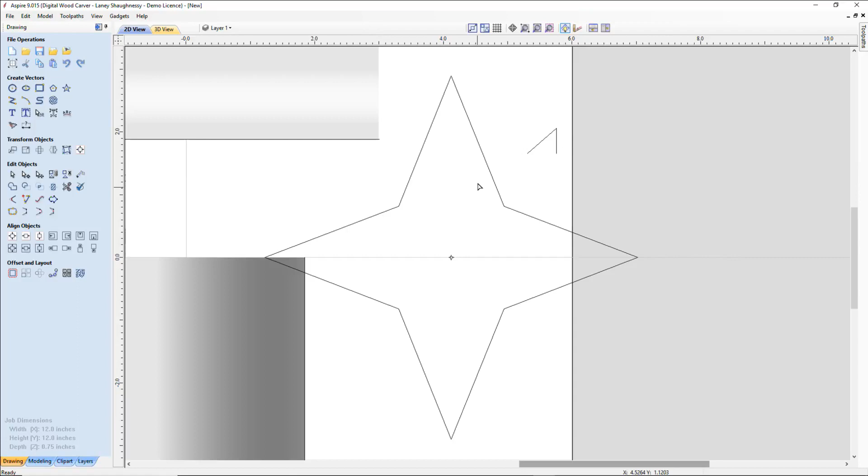All right, so now as I come into my 2-rail sweep, I select my 2 rails, my drive rails, okay, and then I select my profile.

When I click on the rail after the profile is selected, it shows where this profile is going to be swept across. If I right click, now that it's showing these profile lines, I can add to all of the rail nodes. I can add these, and I have nodes at each of these points, and that's typically what we want. We want to divide this up into segments.

This is what creates that kind of nautical star shape. So now when I apply this, the shape is getting applied to all of these segments, but also these segments. Let's look at the 3D view here.

My star is cut off on that one side. And let's not scale it. Sorry, let's apply that. Let's tone that one down a little bit. There we go. The bottom lines are a combination of 2 lines and a profile.

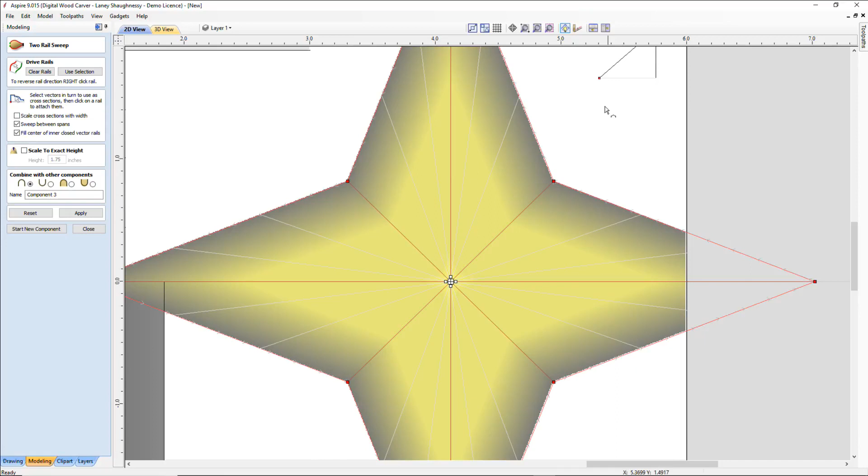Or you have 2 profiles and a profile. Basically these are my lines, this center and this outside edge. That's my 2 lines that it's following. And they don't have to be open vectors, they can be closed, like this star is a closed vector. Then draw out your profile and create it.

All right, so very good question. All right, so let's go back up to Dave. Dave had a question. Let me see if I can track her down.

Thank you for that compliment about the bits, Howard Groves. Todd. Roop.

I found this, tell me if I'm reading the right one, guys. I found this site over the weekend. It's more for scroll saw cutters, but I've used a few PDFs in Aspire, and it worked great. Wanted to share this with the group if it helps. Google Steve Good scroll saw. Yeah, Steve Good's a friend of mine. Got a lot of nice patterns.

Trying to go back, Dave, and find... Laney, if you have time, could you show how to change or switch the project 90 degrees? Was trying over the weekend, no luck.

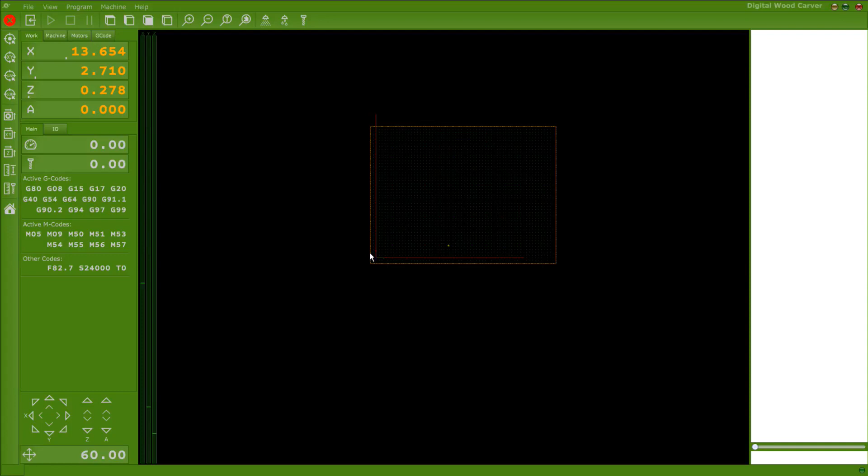In the Vetric. Thank you. Let's see here, what do I got here? Let's open up an actual toolpath. What is this? What is this? World's greatest grandma. That was a Mother's Day project. Okay.

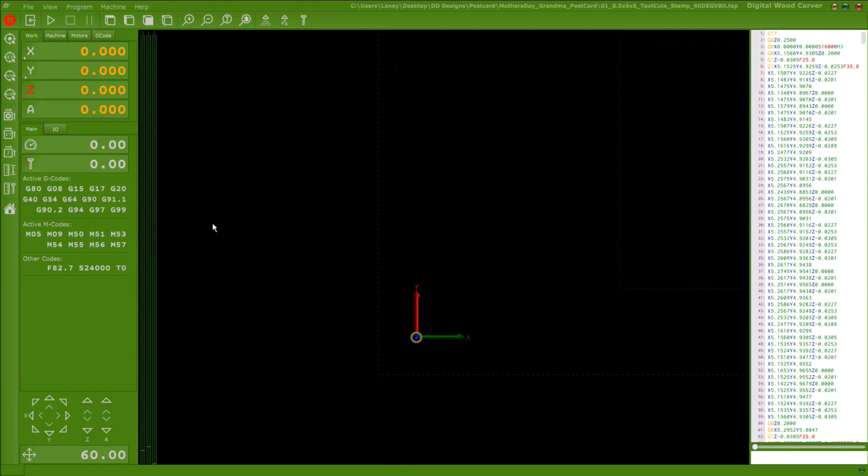Let's first of all get rid of all the offsets and zero out the machine's absolute position and the machine's work position. Let's get proper here. All right, so I want to turn this 90 degrees because I happen to have clamped my board, wasn't paying attention how I clamped it, so I've got it rotated. I don't want to unclamp the board because I just got it secured the way I want it. The clamps are nice and firm, nothing's moving, it's square with the table.

So how can I rotate my design in the software? And here's how you do it. Program menu at the top, rotate, 90 degrees, and click OK. Now you can rotate it multiple times depending on which angle you're wanting to go.

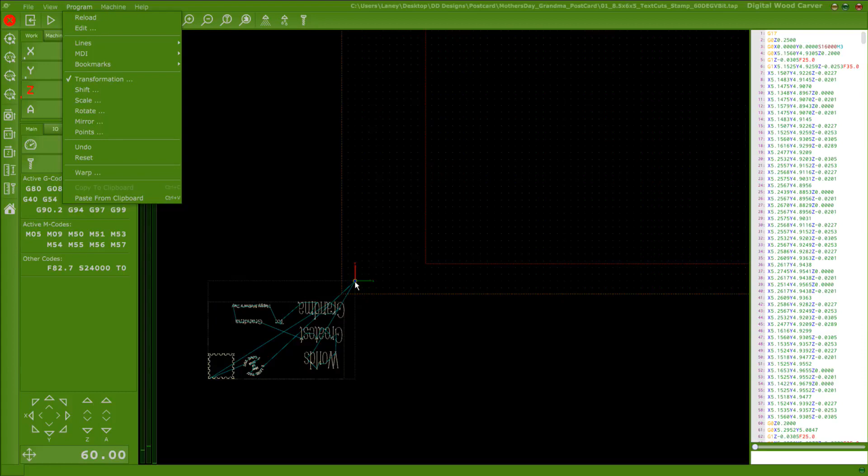Like let's say you didn't rotate it and your board's not facing that way, come in here and rotate. You can go another 90, you can go 180, whatever the case may be. But you're rotating around—in my case I'm working in the bottom left corner. If you were working off center, it'd be rotating off center, right? So rotate, and I'll go another 90 degrees. Ultimately, let's say that's where I want to be. That's how you rotate your design in TNG.

Now, once you've done that, once you've done all your rotations, remove your offset. Okay? And... oh, you sugar booger dooger. I need to get my start point up there. Bear with me a second.

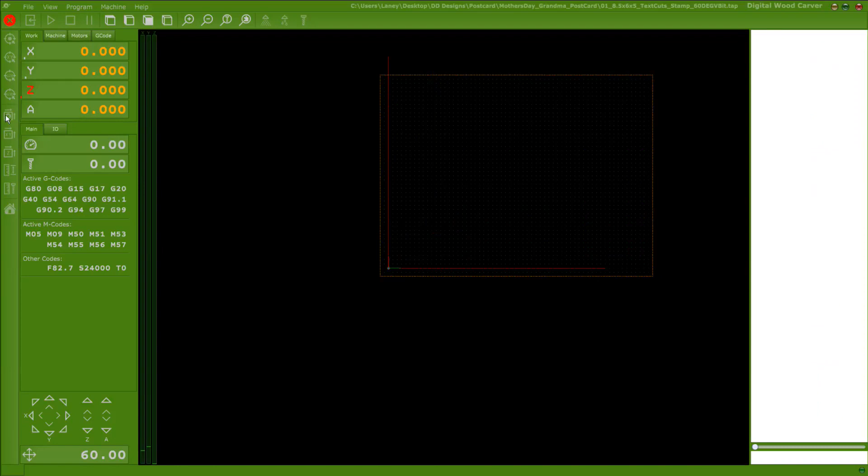All right, let's get rid of that offset. I'm a dumb man, I was sitting there, I kept hitting the offset button and everything, and I threw off my rotate. Bear with me a second. Turn on the transformation. Program rotate, I've still got that shift on. Oh, I don't remember how big this project is. I think it's 4 inches. So shift on the x-axis, 4 inches, 4.00, let's get rid of all those other numbers. Shift is moving this around on your start. On the y-axis, we're gonna make this 1 inch. There we go. Tardar. Had to shift, I had that shift in from earlier that I had to get out of there.

The shift to 0. But anyhow, so program, rotate your 90 degrees, and okay, whatever you rotate, that's it, it will recalculate the toolpath. It will carve over there and everything, it'll readjust the toolpath accordingly for whatever it is that you're doing. All right, and it's the same menu, program, rotate.

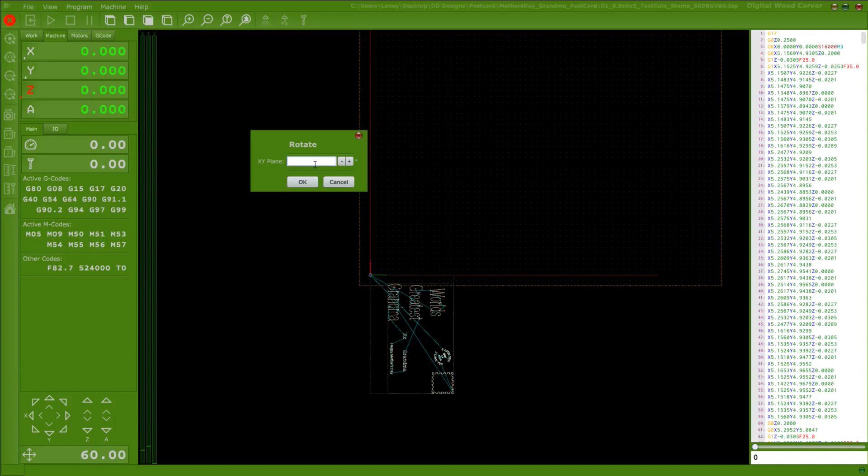Here, I'll even throw in a question that you didn't ask. Hey, what if I have a project I made for a 12-inch by 12-inch board, and I want to carve it, but all I have is a 10 by 10 or a 9 by 9 or 6 by 6 or whatever? Is there any way to scale it in the TNG software, or do I have to do that in my Vectric software? Well, if this is a one-off, I just want to carve this project and I don't have my 12 by 12 boards, all I've got is a cut-off piece, maybe it's 10 by 10 or something, and I want to just scale it down for this one carving, then I'm going to do it on the fly in the CNC USB controller or the TNG. But if it's going to be a permanent change, I want to change it from 12 by 12 to 10 by 10 permanently, then I'm gonna do that in the Vectric software.

But if I'm doing it on the fly for kind of a one-off, then I'm gonna go to Program, Scale. Now, 1 is 100%. So you got to do some math. 100%, right? So if my design is 10 by 10, let's see here, 10 by 10, 10 into 12, that's 1.2, so about 80%. All right, 1.0 equals 100%. So 0.80 is 80%, 0.60 is 60%, 0.45 is 45%. You get the idea so far.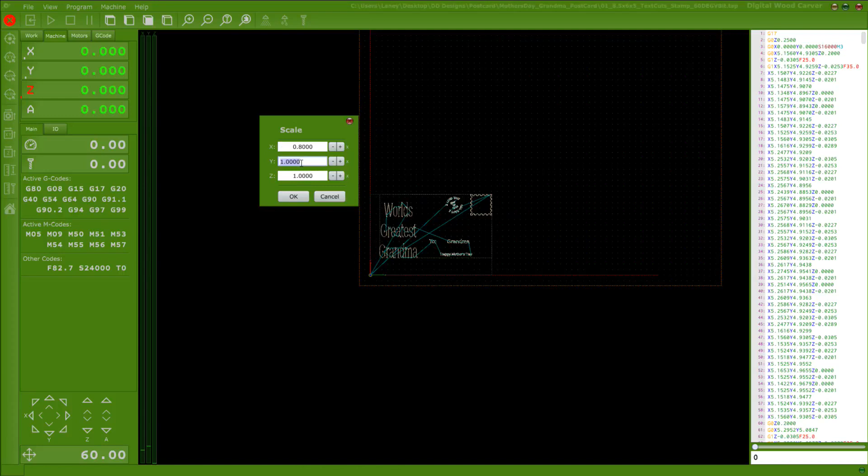0.125 is 12.5%, with me on that? So I want this to step down, I want to scale it down. And now on the Z, do I want to scale the Z height, or do I want to maintain the thickness and stuff, whatever it is? I'll go ahead and scale everything down. I typically only scale the Z by 90, I don't go the full 80, I only do a very small amount, 90% of it. And click OK, and that's going to scale it down for that job, for that run. All right?

David, does the system really know if you set your Z depth using the touch plate? Yes, because the sensor gets set off. So you have an I/O sensor, and if you're in the CNC USB controller, you'll see the sensor active down here. But in the software, you'll see it, let's see if I can invert it just to make it look like it lights up.

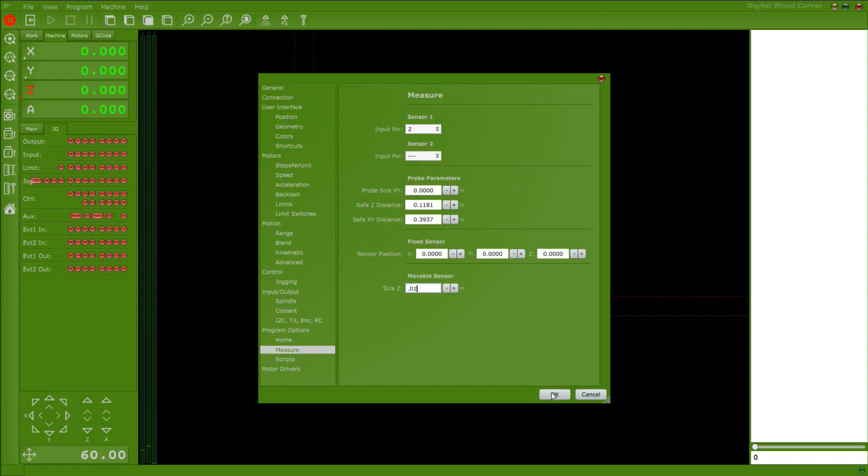So it absolutely knows that you're touching off. But keep in mind, guys, let's go to our settings file in TNG software and go down to measure. Make sure your movable sensor doesn't say 0.0630. Make sure it says 0.01, the thickness of your touch plate. That way, if you do the automatic touch off, you're getting an accurate reading. Make sure it's set to 0.01 in that measure. So file, settings, down to measure, movable sensor should be set to 0.01.

That's if you do the automatic touch off. You make sure you have the right sensor programmed into your settings. So does the system really know if you set your Z depth using the touch plate? This was posted when you were showing how to set your depth when changing to the V-bit after a pocket cut. You said to take away 10 thousandths when using the touch plate, but to use full 25 thousandths when setting the bit without the touch plate. Yeah.

So you can either eyeball it, Dave Kinsey. You can either eyeball that bit coming down into the pocket and say, yeah, that's kissing that, and type in 0.25, because whatever you tell that program it is, it is. If you tell it it's China, it's China. If you tell it it's an inch, it's an inch. So you want to tell it the exact depth, so you're not cutting into your table. But so you set it as 0.25.

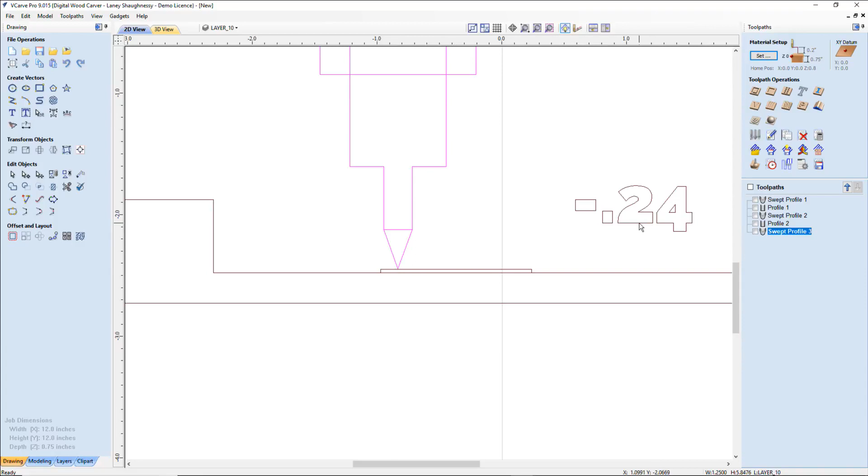But if I touch off on my touch plate, my machine's going to stop automatically when it makes contact with that touch plate, because that sensor is going to get active. And when it's active, letting me know I'm making good contact with my touch plate, then I'm going to go into my Z box here in the TNG software or the CNC USB controller, and I'm going to type in that negative. Don't forget the negative sign, because you're down in the wood now. 0.24. I'm going to lock it in, and I'm going to tell it, hey, I'm sitting 10 thousandths of an inch above my 0.25 start depth, which would be 0.24. Now I'm sitting down negative 0.24 below zero. We're just telling it where it's at. So it absolutely does know where it's at when you're using your touch plate. But you can eyeball it, or you can be a little bit more accurate and use the touch plate.

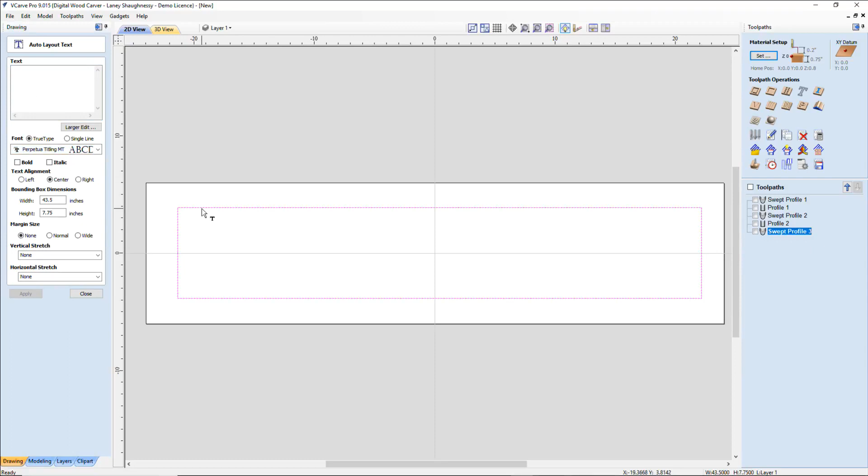Dadgummit. Dadgummit. Center. None. Apply. Oh, my font was messing me up. All right, one more time. You can do it. You can do it.

Okay. So, if I have a design and I create a toolpath for that design, whatever it may be, in order to tile in the Vectric software, and there's a whole video on this in the Vectric tutorial library, which is phenomenal, it goes in depth on it. But we have what's called a tile manager.

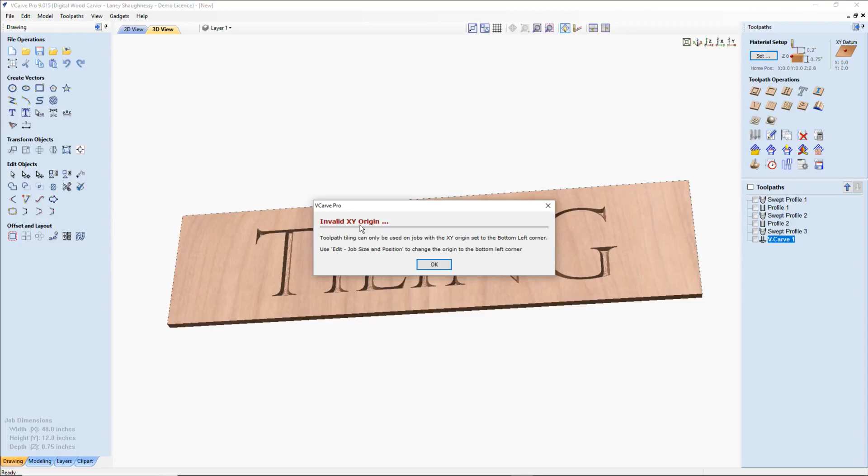And the tile manager allows me to exceed my cutting area of my CNC version along the x-axis and the y in both directions. Now notice it says invalid origin starting point. So in order to do a tiling toolpath, you have to have a starting point at the bottom left corner. So we're going to do that, and we're going to recalculate this toolpath. Now that I have that toolpath created, we can open the tile manager.

And in the tile manager, I can tile the toolpaths. Let's say for that 48 inches, I want to carve every 18 inches. I want to break up the tiles every 18 inches for whatever reason. I could just do it in half, in two halves, every 24 inches, and I update those tiles. Notice you'll see tile 1 here, if I were to preview this cut.

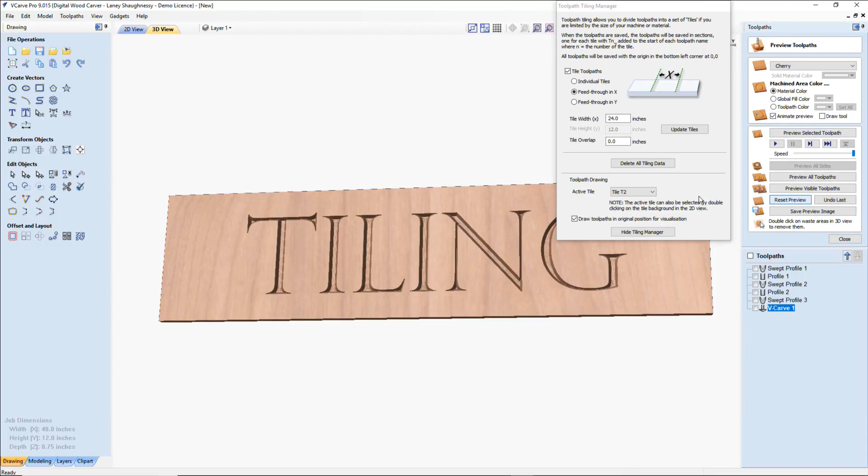And if I were to preview tile 2, if I were to reset my preview and just preview tile 2, it's only going to cut what's in there. And then I'm going to save that toolpath.

When I save that toolpath, I want to have my tile manager open. Notice how it says output tile toolpaths up here in the top right corner. When I tile this and save this file, if we looked at that folder, you'd see two toolpaths, T1 tiling toolpath and T2 tiling toolpath. So tile 1, tile 2, it breaks it up for me and everything.

Now the crucial part, that's not the hard part, setting up your tiles, whether you feed along the X-axis, break it up into individual tiles where you're cutting multiple boards to assemble together, or feed along the Y, which you can't do on your digital wood carver. It's either X or individual tiles, your choice. But creating the tile toolpath is not the thing. It's how the setup, where it all comes down to, is the setup on the CNC machine.

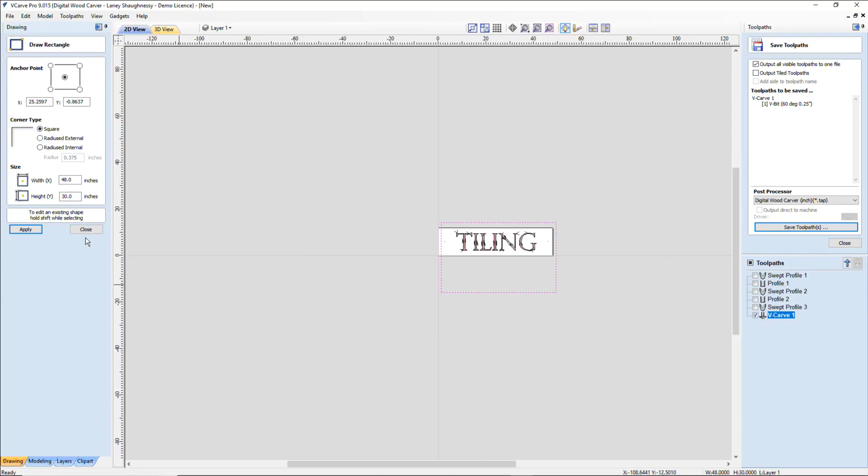So we've got our board here that we're going to clamp on our CNC machine. Let's actually draw the rectangle, the table, out properly. It's 48 inches in length, 30 inches wide, and here's my cutting area. So this is my tabletop right here with my T-tracks and all that wonderful stuff.

But what you want is some kind of guide, some kind of straight edge, to put along your board, to clamp it on your table. It's something that your board references up against.

On that guide, that straight edge, there is an identifying mark. I use a ruler, so I use the number 3 mark on my ruler. This is going to be your 0. This is where you zero your bit out, on that corner of the board. And to make it more appropriate, you actually want that board up right against the edge of that board.

There you go, all right, so that's our 0 point. We always start off with the front edge of the board at that 0 point. And when we carve tile 1, T1, it's going to start from there, carve tile 1, and come back home.

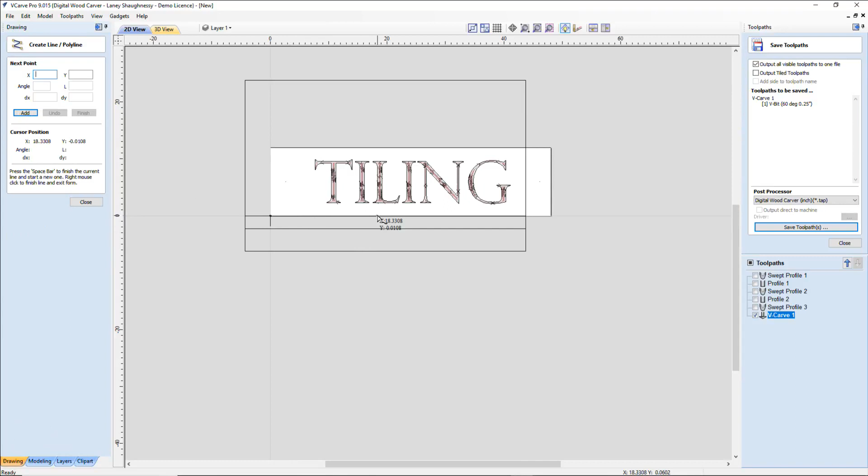Now on our board, 24 inches down, 18 inches down, whatever we set our tile at, we have a mark, an identifying mark. After that first tile gets carved, that board gets slid down the table until that mark on our board lines up to a nut, to a T, lines up perfectly.

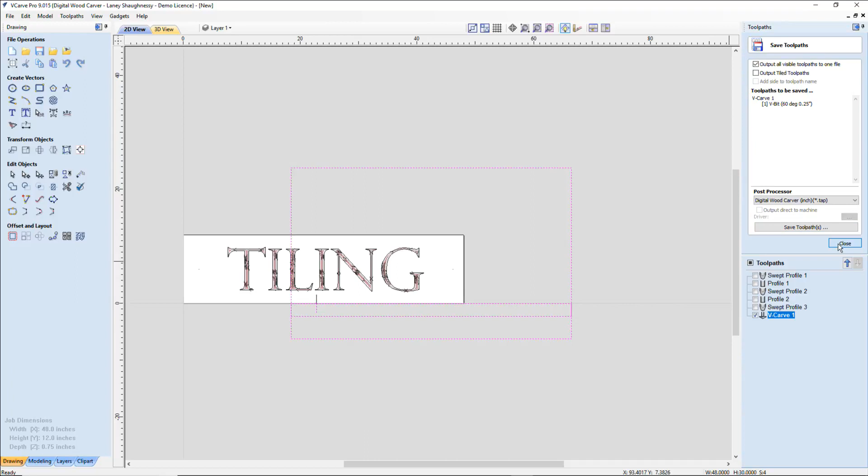And then now we carve tile 2, which is the second half. If I'm a little worried about not getting my line just right, maybe I can't draw a straight line to save my life, whatever the case may be, then we have a backup here.

Tile overlap, so we can overlap back into the previous tile by a certain distance. If I go maybe 0.06, it creates an overlap so that when it goes back, it'll go into the previous carving before it carves the next one. You'll create an overlap gap, you see this pink mark here. It'll carve beyond that overlap, so that even if you're off, you'll get a consistent, seamless carving, if you're sure about that.

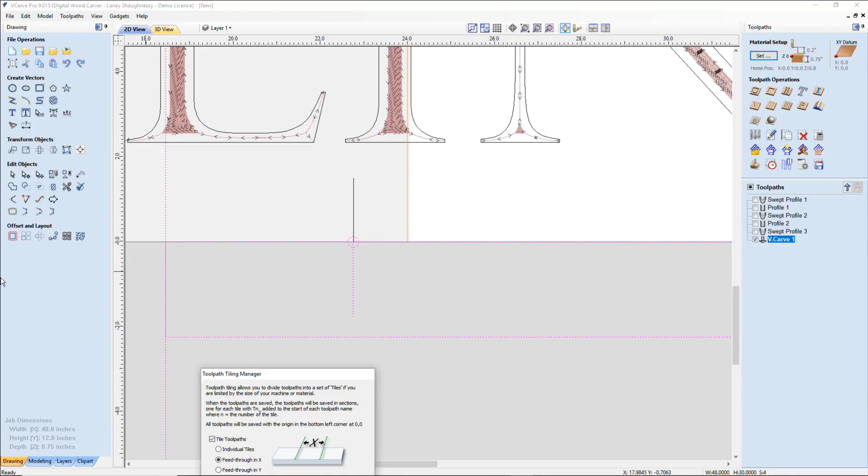But it's most important, it's all about the setup. If you carve this first tile in one position, and the second tile in another position, well, one of two things has happened. You have, excuse my language, debris between your board and your straight edge, and it caused it to be off the straight edge a little bit, not running exactly straight, so it's just off. And then as you slide that board down, all that debris goes with it. And when you come up against it and carve this one, all of a sudden it's off by a half inch or whatever.

Whatever the reason is, your board is not completely straight at 90 degrees to the machine. When you put that straight edge on the table, take your router - a lot of you who have the Hitachi router got a pretty cool little tool in your Hitachi box if you didn't throw it away. It's like an alignment pin, got a half-inch shank on one end, flip it over, a quarter-inch shank on the other, and a round black disc in the middle. You can put that up in your router and run it along that edge.

Put it in your router and run your router all the way down from edge to edge to ensure - you would do it on the other edge, the outside edge too. That's fine, it just depends on where you put your straight edge. But you would run it down that edge to ensure that straight edge is running absolutely true to your machine, because if it's off in any way, your carving is going to be off.

All right, it's all in the setup. Take extra precaution and extra time in setup. You're setting up your clamping so your router's not hitting your clamps. Your straight edge - make sure if you're going to use a wooden straight edge that it's absolutely straight. For me, I went down and spent $9 at Lowe's and bought a Swanson ruler. It's 1/8 inch thick, which gave me a perfect lip for a straight edge. It's very low profile, so I didn't have it interfering with any of my cuts or my router, especially when I'm carving on the outside of the edge, when I'm doing X and Y tiling.